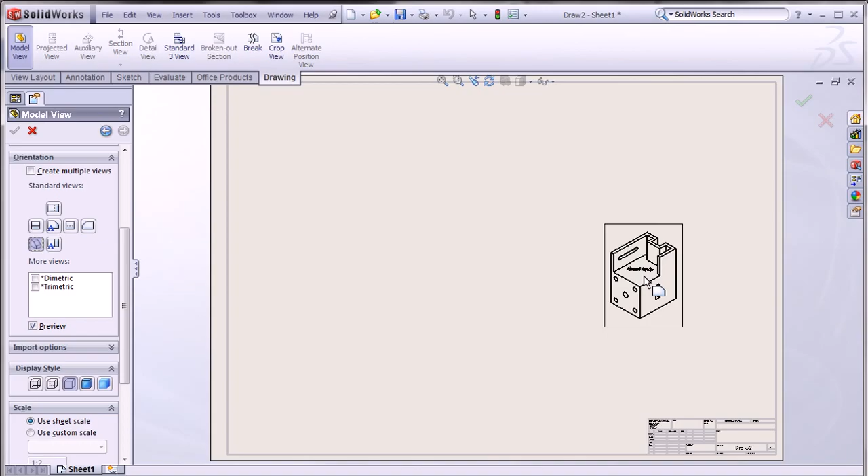نختار شكل الديسبلاي، شكل العرض، أو بهذا الشكل، أو بهذا الشكل، أو يكون شيدد.

نختار العرض، hidden lines removed. أوكي.

نختار المسقط الأمامي مثلا أو الجانبي، فيقوم بالتغيير عليه في ورقة الرسم. نقوم بوضعها في المكان المناسب.

أوكي. الآن المسقط الجانبي والعلوي يتم إنتاجهم من هذا، المسقط العلوي.

هناك عدة خيارات أيضا، وهي خيارات السكيل مثلا، الدايمنشن، use sheet scale أو use custom scale. في هذه ورقة الرسم السكيل هو 1:2، يمكنك التعديل عليه.

dimension type: projected، true، و3D display. نختار المسقط الأمامي في هذا المكان.

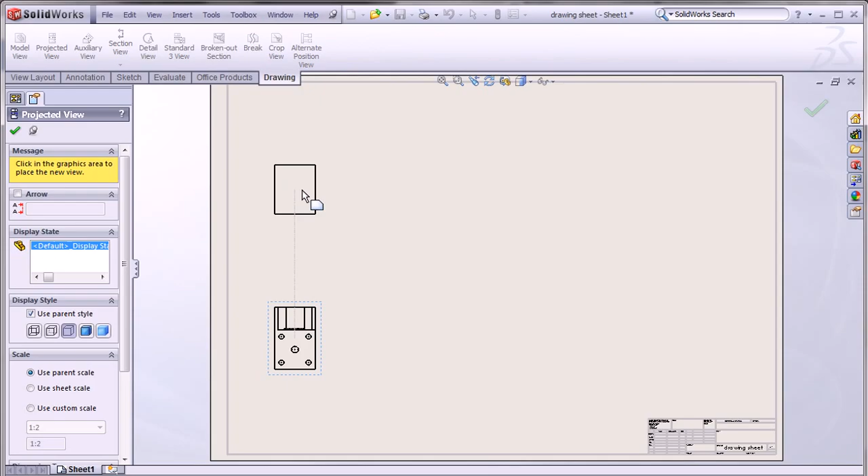للأعلى يكون المسقط العلوي، والمسقط الجانبي، والمسقط الثلاثي. أوكي.

الآن نقوم بترتيب الورقة، بهذا الشكل.

السبب وضع عرضين ثلاثيي الأبعاد هو التالي: نريد عمل section view مثلا للمستوى العلوي.

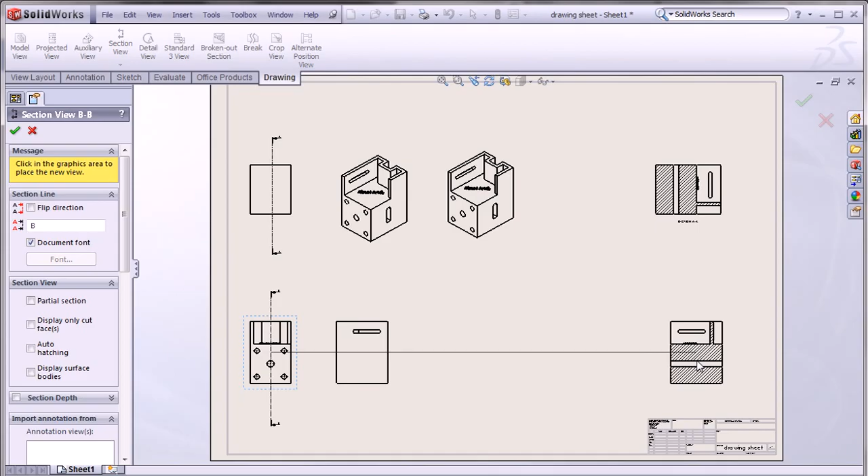فيقوم بعمل section view. نقوم بعمل section view للمستوى الأمامي بهذا الشكل، وللمستوى الجانبي أيضا بهذا الشكل. السكشن فيو يقوم بقص المجسم إلى نصفين.

أما الألايند سكشن فيو فيقوم بقص المجسم إلى أرباع. فهذا ألايند سكشن فيو، أما هذا فسكشن فيو، وكلها مسمية بأسمائها. أوكي.

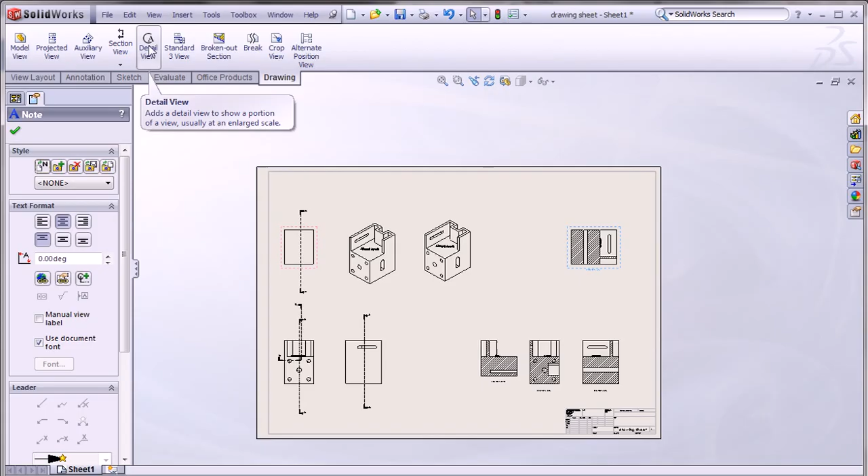الآن نختار الديتيل فيو. نستطيع عمل الديتيل فيو عن طريق رسم دائرة في المكان الذي نريد توضيحه، فمثلا نقوم بعمل ديتيل فيو في هذه الناحية، ونقوم بتكبيرها.

ووضعها في أي مكان. نلاحظ تم تكبير هذا ديتيل فيو. نقوم بتحريكه، ووضعه بمكان مناسب.

الآن نستخدم البروكن اوت سيكشن. broken out section يتم على المساقط نفسها عن طريق رسم spline في المكان الذي نريد توضيحه، فالـspline يقوم بفصل القشور الخارجية للجسم ويظهر ما في داخله إذا كان هناك تفاصيل يجب إظهارها.

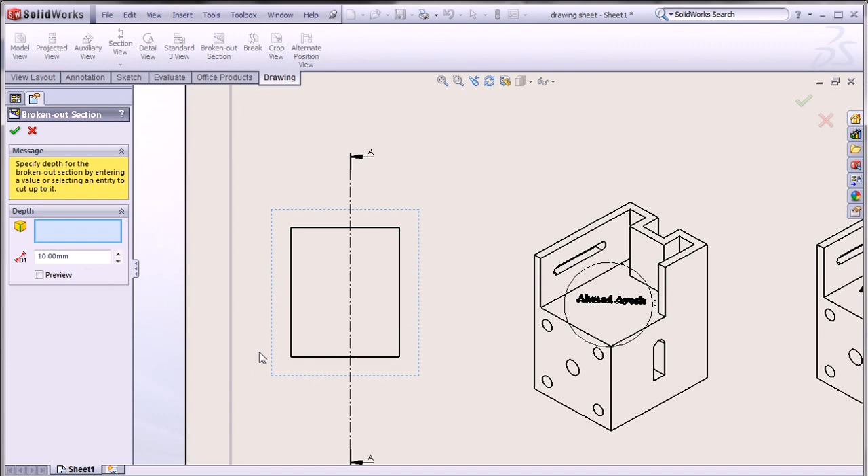مثلا نقوم بعمل section view في هذه الناحية عن طريق spline ويكون مغلق. أوكي، فأظهر لنا ما في داخل هذا الجسم عن طريق البروكن اوت سيكشن فيو.

نقوم بعمل بروكن اوت سيكشن فيو في هذه الناحية عن طريق spline أيضا، broken out section view. إذن broken out section view يقوم بإظهار الملامح الداخلية للمجسمات.

نقوم بعمل break view للمسقط الجانبي، وذلك عن طريق select drawing view to break. selected view cannot be detailed view or cropped view، إذن يجب أن يكون مسقط.

نختار شكل broken view للأعلى أو بشكل horizontal أو vertical. الجاب 10 ملم، ونختار straight cut أو curve cut أو small zigzag cut.

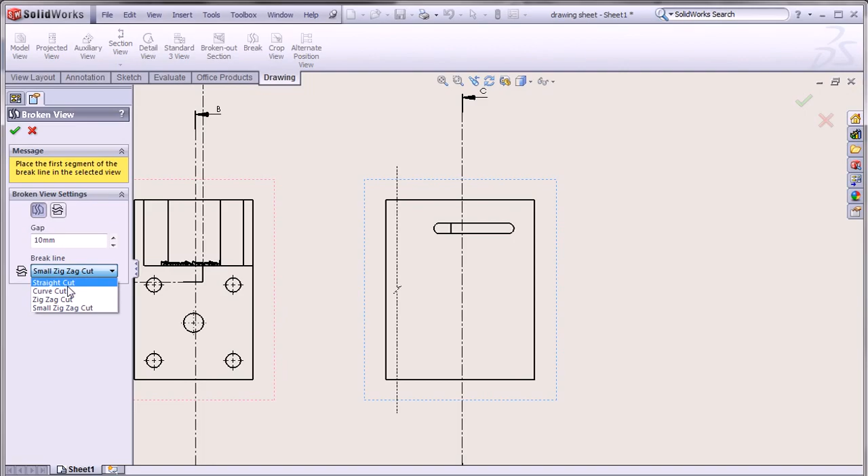نختار الكيرفد cut ونضعها في المكان، فيقوم بعمل broken view. نختار الهوريزونتال وزجزاج cut فيقوم بعمل البروكن فيو.

الآن نستخدم الكروب view. crops an existing view to show only a portion of the view، عن طريق رسم دائرة. نرسم دائرة في البداية، نرسم دائرة في هذه الناحية، ومن قائمة drawing نختار crop view فيقوم فقط بإبقاء هذه الدائرة.

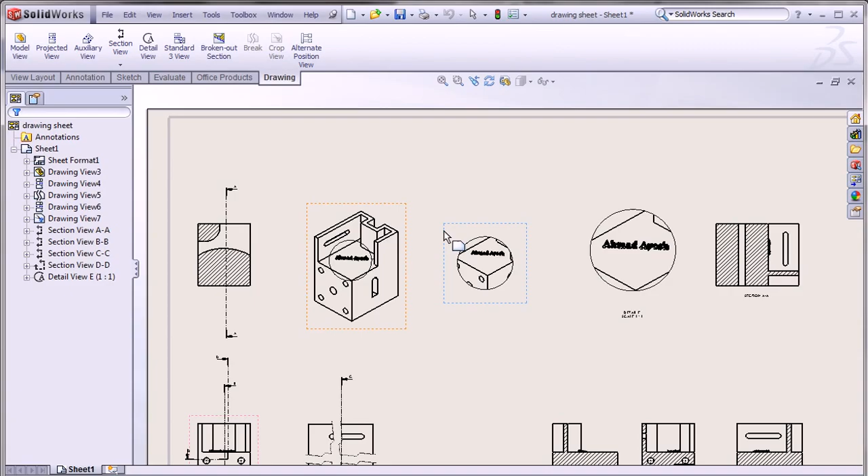هذا هو طريقة عمل drawing sheet. zoom to fit.

Drawings are used to document your 3D models in the traditional 2D format, including displaying dimensions and other instructions useful for manufacturing purposes. In SolidWorks, creating drawings is secondary to creating 3D models of parts or assemblies. What I mean is that you first create models in 3D, and then use the 3D data to generate the drawing.

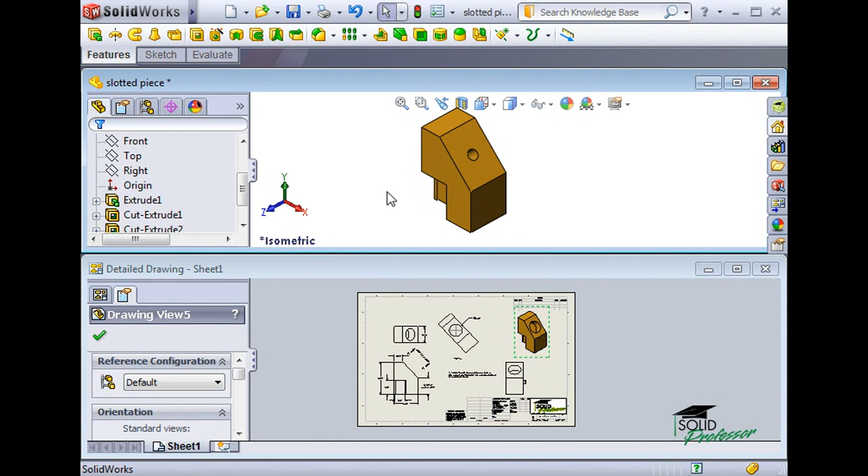Even after the drawing is created, there's a direct association between the 3D model and the drawing. When changes are made to the model, each and every view in the drawing will reflect the change. This relationship between the 3D model and 2D drawing makes the drawing process fast and accurate.

Because of the mainstream adoption of 2D drawings in the mechanical industry, drawings are one of the 3 main file types you can create in SolidWorks. To begin a new drawing, you can use the File, New drop-down menu, or use the blank page icon.

If you already have a part open, you can simply click on the Make Drawing from Part icon, or select it from the File drop-down menu. All 3 methods will bring you to the same interface to select the drawing template.

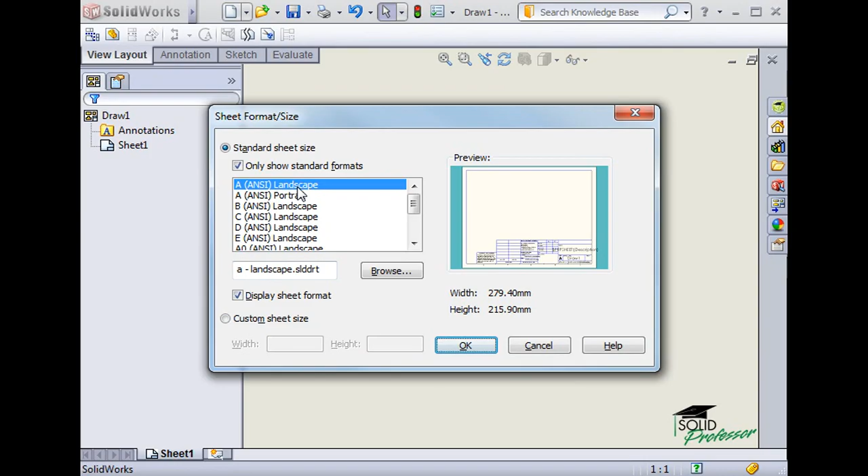This dialog box offers you a choice of sheet formats, including several standard sheet formats, as well as the option to use a custom sheet format. For this example, I'll select the standard A landscape format.

This is the drawing interface. It's laid out similar to the part and assembly interfaces, with a working area, a feature manager tree, and a slightly different toolbar. Toolbars that were used in the part and assembly interface are now gone and replaced by two new ones, the Annotations toolbar and the View Layout toolbar.

We'll take a look at the various commands on these toolbars later in this lesson. The feature manager tree is also arranged differently. Since we're no longer working in 3D, you don't see reference planes or an origin listed. Instead, you see the basic requirements for a 2D drawing: a sheet of paper listed as Sheet 1, and a sheet format. The sheet is the drawing area, and the sheet format is the title block that you see around the sheet.

There are two distinct modes you can use when working on a drawing. You can be in Edit Sheet mode or in Edit Sheet Format mode. Edit Sheet mode is used to create drawing views and add details such as dimensions and notes. Edit Sheet Format mode is used strictly to modify the title block surrounding the drawing.

Switching between the two modes is simple. By default, when starting a new drawing, you'll be in Edit Sheet mode. This is indicated here in the status bar. While you're in this mode, the title block will appear in a faint gray color. To switch to Edit Sheet Format mode, right-click on the sheet format listing in the Feature Manager tree and select Edit Sheet Format. You'll see the appearance of the title block change.

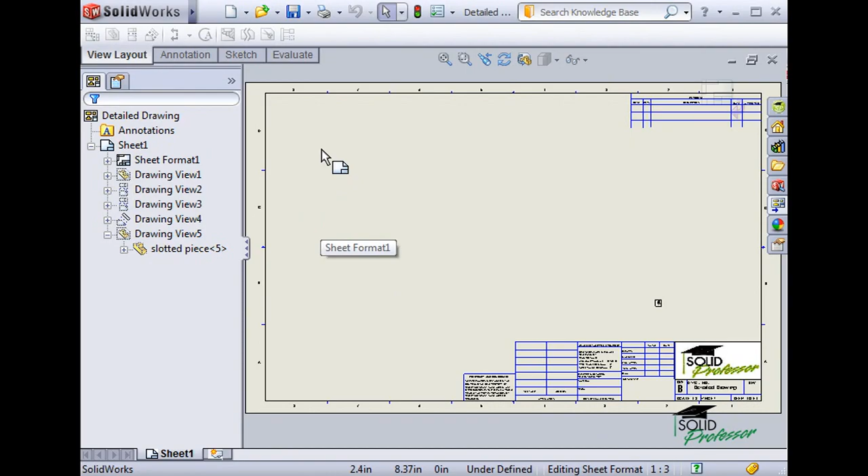When you're working with a drawing that already has existing views, it will be very obvious when you switch modes. As soon as you switch to Edit Sheet Format, all the views will disappear. This is only momentary, meant to help you focus on just the title block when you make changes. When you're done, switch back to Edit Sheet mode, and the drawing views reappear.

The specifications for drawings vary immensely from company to company and individual to individual. For the remainder of the lesson, I won't be teaching you how to create one specific standard of drawing, but rather the tools and techniques required to create and detail drawings in general. This will allow you to produce your style of drawing, no matter how unique.

Model view is a term used to describe any of the standard views available in a 3D part, such as front, right, top, and isometric. Let's begin a new drawing. I'll click the new file icon.

Specify a drawing template and select a sheet format. There are two ways of creating model views, either by activating the Model View command or by using the View Palette. Let's begin by going over the first option. You can select the Model View command from either the Insert drop-down menu under Drawing View, Model, or by using the Model View icon on the Drawing toolbar.

Now as I move my pointer into the working area, you can see there's a block next to my cursor. This block indicates that you're in the process of creating a view, and that you must now tell SolidWorks what part or assembly you intend to show in the view. Although we're working on a model view in this example, this block will show up whenever it's necessary for you to identify which 3D model you're referring to.

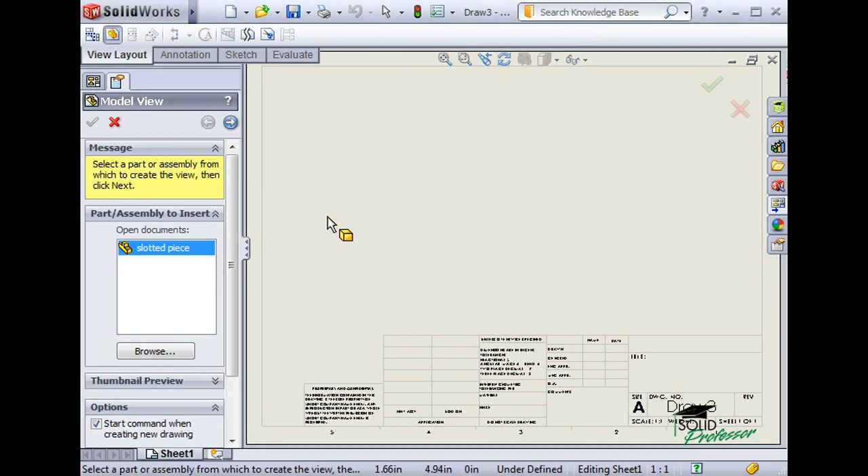Here in the Property Manager, you'll see a couple different ways to identify the 3D model that will be associated with this drawing. You can either select from a list of models which are currently open, or browse for other existing models. Once I select it, I'll click the Next button.

The Property Manager now displays a message telling me how to proceed with this model view. I'll begin by adding a single view and specifying the view orientation that I want displayed for this view, front in this case. Before I click on the sheet to place the view, I'll be sure to have the Auto Start Projected View option activated, and then click somewhere on the drawing sheet to locate the view.

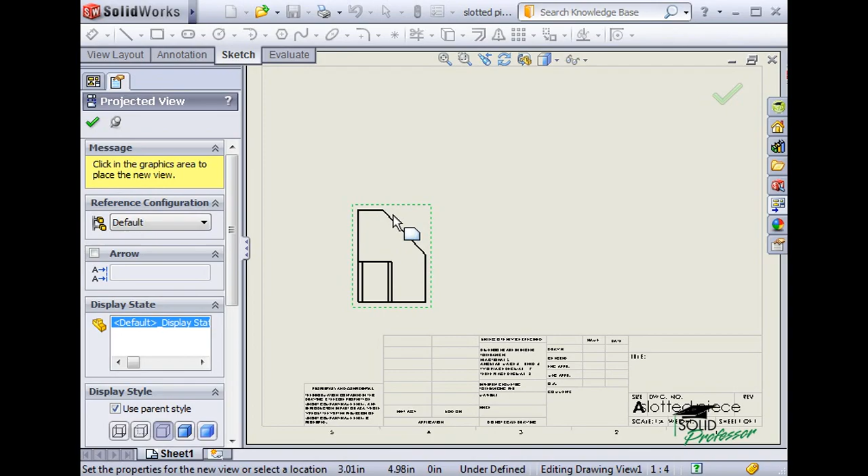Since I had the Auto Start Projected View box activated, the Property Manager automatically switches to Projected View mode. When you move the cursor away from the view you have just created, SolidWorks automatically projects the top, right side, and isometric views for you.

Before we proceed, let me show you another way you can have SolidWorks create these views for you automatically. I'll click Undo to get rid of these views.

To begin inserting views again, I'll go to Insert, Drawing View, Model to get back into Model View Property Manager. I'll use the same part as before, but this time instead of using the single view with the Auto Start Projected Views option, I'll select Multiple Views. With this option, I can click on the icons that represent the standard views I want shown. I'll click the icons for Front, Top, Right, and Isometric.

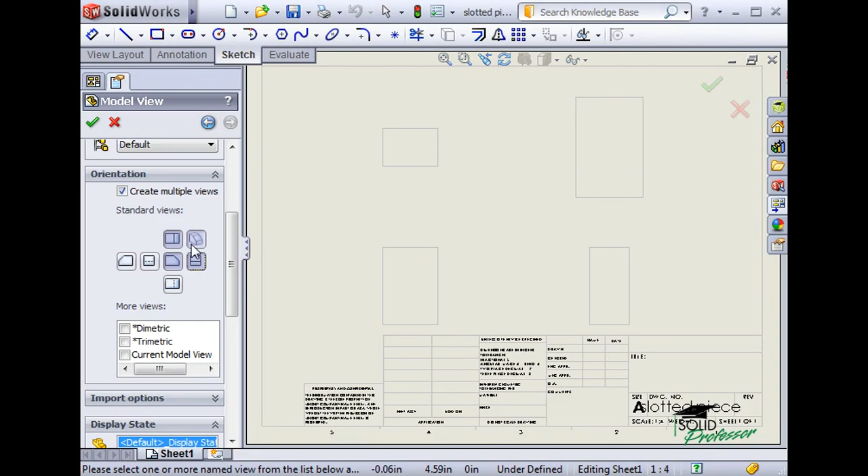When I click OK, all of the views will be added. The front view is the main parent view of all of the other views.

Now, if the parent view you created is not the orientation you desired, you can click on the view and then click on one of the other view icons to use that orientation instead. As soon as I do, SolidWorks prompts me that this will update all of the other dependent views projected off this main parent view. When I click Yes, all of the other views will be updated.

Also, to move any of these views, you can click and drag a view by clicking anywhere on its border or any other model edge or vertex. You can also move views and other items in a drawing using the arrow keys on your keyboard. Just select the view and press the arrow keys to move it.

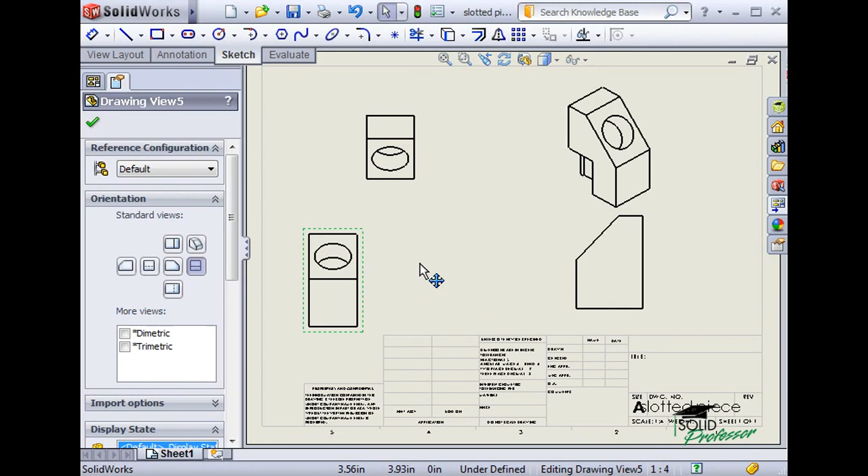As I mentioned earlier, there's actually another way to insert drawing views besides the Model View command we just went over, the View palette. Let me delete these views and we'll begin again with a clean sheet.

To activate the View palette, click on the View palette icon found on the task pane. As with the Model View command, I can select from a list of open parts, or I can browse for a specific part. I'll go ahead and select from the list. Next, I simply drag and drop a view from the View palette into our drawing.

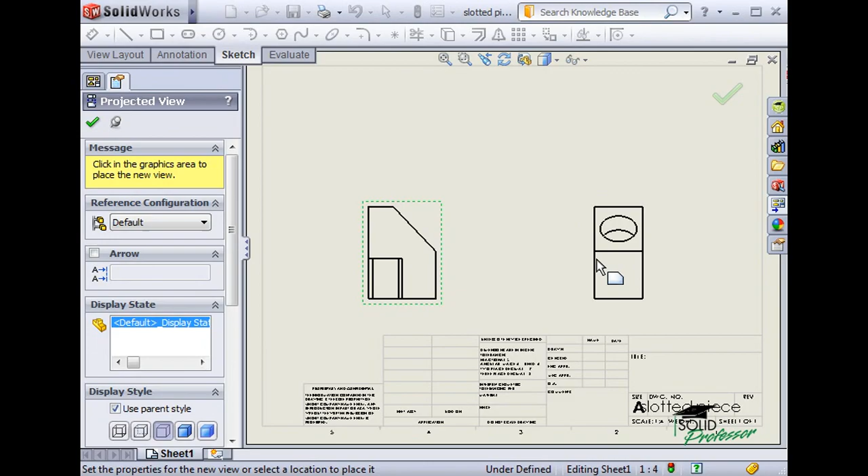Once the drawing view is placed, the Projected View command is automatically launched, allowing you to create the remaining views.

Although the View palette does allow you to preview all possible orthographic views of a part or assembly, it's not possible to select multiple views in the View palette and drag them together onto the drawing. It's only possible to drag a single view and then use the Projected View command to add the additional views.

Once you already have a view created in your drawing, a projected view is one of the simplest views to create. Simply activate the Projected View command from the View Layout toolbar. Once the command is active, all you have to do is select the view you wish to project from, and move the pointer in the direction you wish to have the view projected.

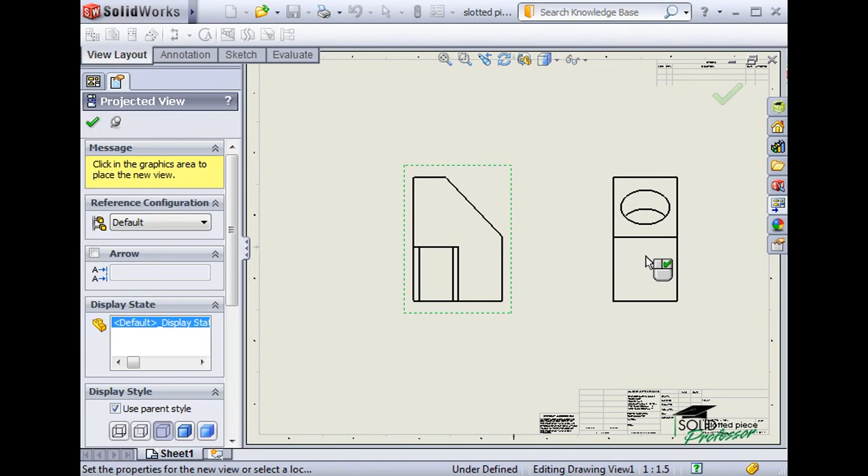Once the view is in the proper location, click and it will be created. With the projected view, the Property Manager gives us an option to display a view arrow along with a label if necessary.

You can see in this isometric view that the part has a hole on this angled face. In order to display the hole properly in a drawing, an auxiliary view must be used.

To create an auxiliary view, activate the Auxiliary View command from the icon in the View Layout toolbar. Once the command is active, click the angled edge of the model to establish the direction of the auxiliary view. Once again, just move the cursor to the desired location and click to locate the view. The view arrow can now be moved or stretched by clicking the arrows or the line and dragging them.

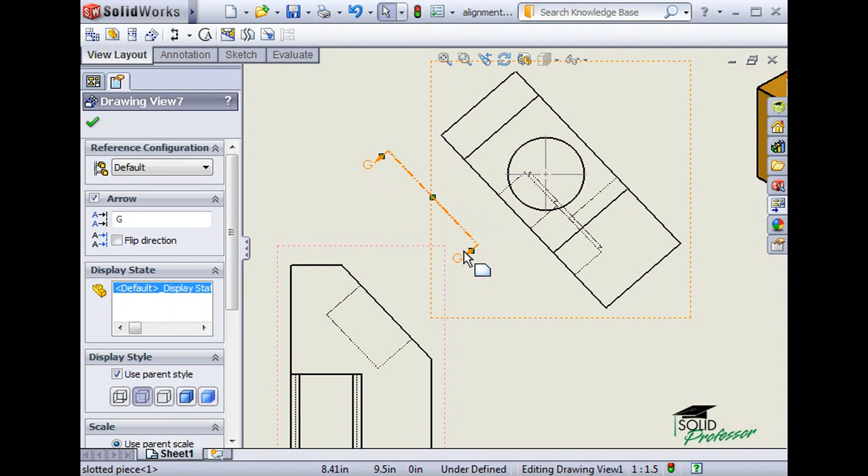It can also be hidden by unchecking this option in the Property Manager.

One of the more common views used in 2D drawings is the section view. Creating a section view in SolidWorks is straightforward. Once a view is in place, I use the Section View icon here in the View Layout toolbar, or use the Section View command in the drop-down menu under Insert, Drawing View, Section.

To create the section view, I simply need to draw a line indicating where I would like to section the drawing view. In this case, I would like to create a section view that cuts through the center of the circular part.

However, notice as I move the cursor near the view, I'm not getting any feedback. At this point, if I draw the section line, there's no way to know if it's cutting through the center. There's actually one step I need to do before drawing the section.

I need to wake up the drawing view's geometry to be used as a reference. If I hover my cursor for a second over the outer circle, notice the geometry is activated, and I see inference lines to the center of the circle. This process works for any other geometry as well in a drawing view.

Simply hover over a line or point or any other geometry to wake it up and infer to it for aligning a section view. Now I just sketch a line through the view that I wish to section. Be sure the line extends completely through the part.

There are several options in the Property Manager that will allow you to change the way the section view is displayed. These options become available upon selecting the view, so it becomes highlighted. You can flip the section view direction by clicking the Flip Direction checkbox, change the label used for the view, the note font, and here you can select to display only the geometry that is cut, thus eliminating any edges that are visible in the background.

To change the location of the section view, I can activate the Section Depth option. This displays a line parallel to the section line that I drew earlier. This new line determines where the section view is taken. However, the original section line will remain unchanged.

I can change the depth of the line by using the spin box, or by dragging the line in the graphics window. Finally, if I had any edges in the view, I could use them as a reference for the section view depth. To see a preview of what the section view will look like, I simply click on the Preview button.

Since I want my section view to be through the center of the part, I'll deselect the Section Depth option and click the green check to finish the section view.

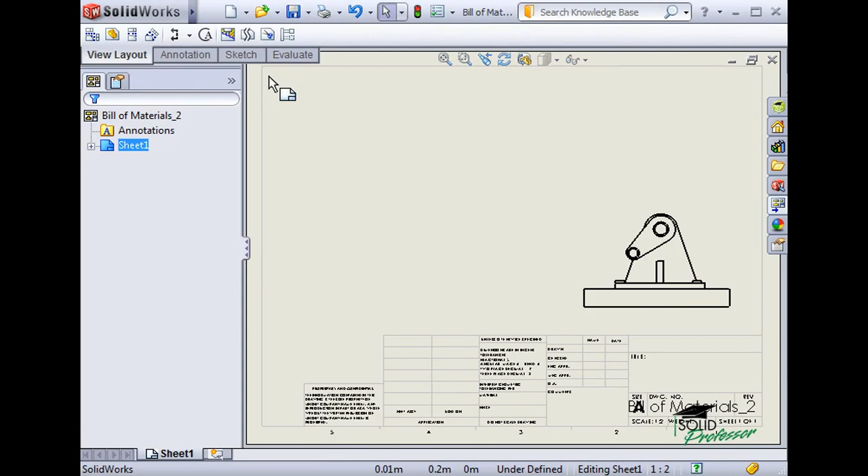When creating a section view of an assembly, you'll find options available that did not come up when creating section views of individual parts. Creating the section view line is the same. You use the same section view icon and sketch a line through the assembly. The difference becomes apparent after completing the section line, at which point this dialog box will appear, the section scope.

With the section scope, when creating a section view through an assembly, it's possible to exclude one or more components from the section cut. Here, for instance, I wish to cut through the base plate and the bracket, but not the swing arm. By clicking the swing arm, it's added to the list of components that will be excluded.

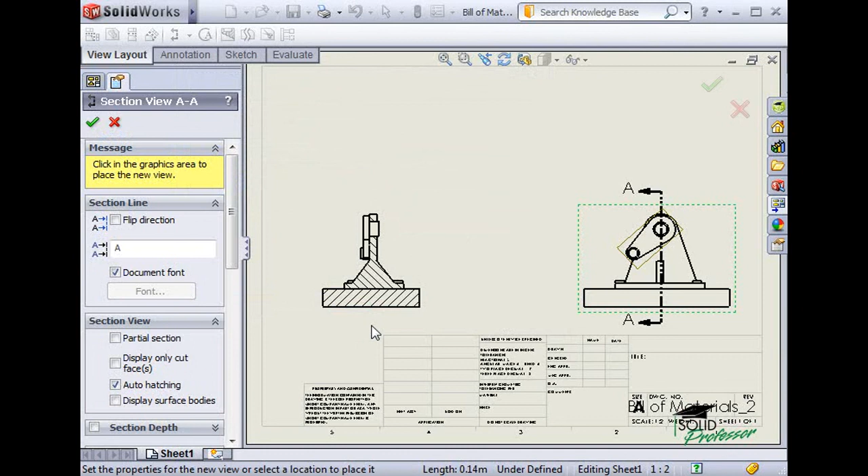Before I click OK, I'm also going to check the auto hatching option. This will cause the crosshatch lines of adjacent components to alternate direction, making it easy to tell them apart. Now I'll click OK, and click once more to locate the section view.

As I zoom in, notice the swing arm has not been cut. Also notice how easy it is to tell components apart with the alternating crosshatch.

If you need to change which components are cut, simply right-click on the section view and select Properties. The Section Scope tab is the same one we saw when the view was first created. I can add to the list of excluded components or take items away either by clicking on them again or by highlighting an item and pressing Delete on the keyboard.

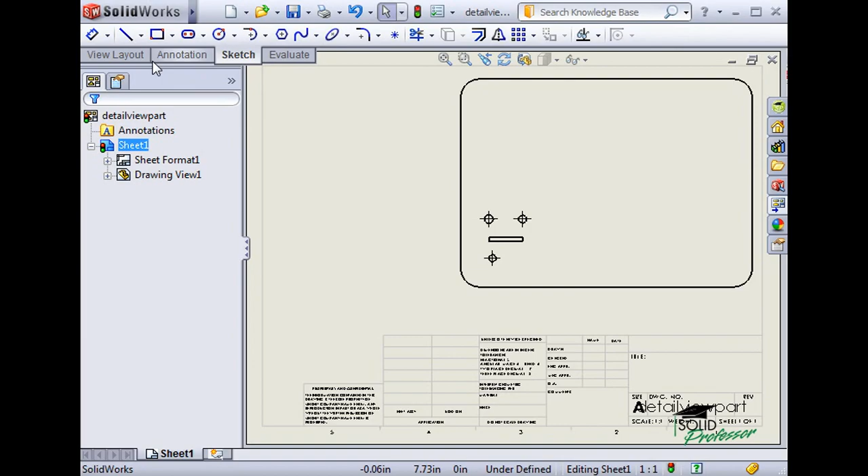When a view contains small features that are difficult to see as a standard drawing view, a detail view can be used to zoom in and make things clear. To create a detail view, click on the Detail View icon in the drawing toolbar, or find the Detail View command in the drop-down menu under Insert, Drawing View, Detail.

The command automatically activates the Circle Sketch tool. With the Sketch tool, draw a circle to identify the area that you wish to zoom into. Once the circle has been sketched, move the pointer to the area on the sheet where you wish to locate the view and click once.

The detail view will appear with a label. The label and font can be customized here in the Property Manager. There are also options in this drop-down list that allow you to select different display options for the view.

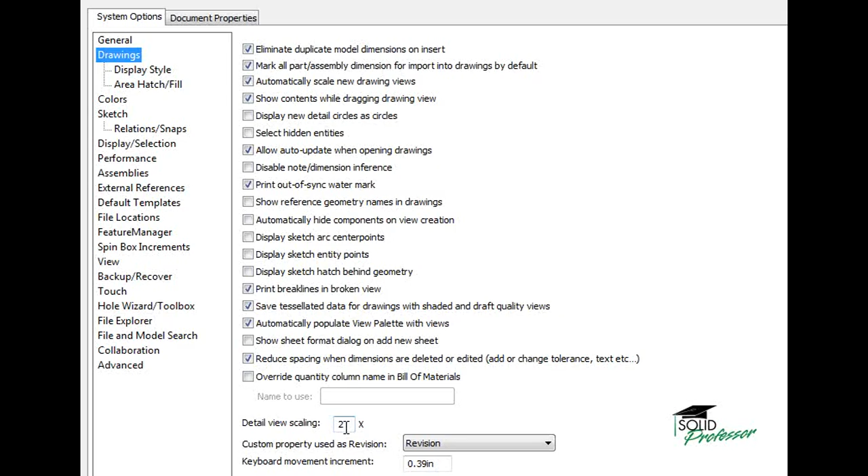Notice that the view appeared with a custom scale of 2:1. This automatic scaling happens as a result of a setting found under System Options in the Drawings section. Here you see the default scale I'm using is 2x, or twice the overall sheet scale.

Even after the detail view has been created, the area covered by the detail view can be changed at any time. To increase the area of the detail view, click on the circle used to create the view and drag the circumference of the circle.

To move the circle, click and drag the center. As you do this, notice that the detail view will update immediately to show you the result.

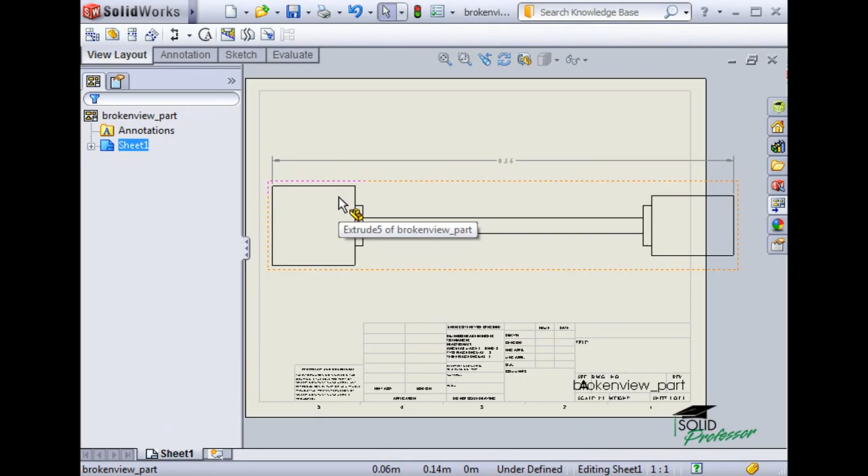A broken view can be used to take a view like this, which is too large to fit on your drawing sheet, and break it so only important details are shown. To break a view, select the break icon in the View Layout toolbar.

Select the type of break in the Property Manager and the desired gap size and break line style. Next, simply move your cursor to the area of the view where you would like to start the break. Click once to locate the beginning of the break, then click again to locate the end of the break, and the view is automatically broken.

Any dimensions spanning the break will still display the true dimensional value. However, the dimension line will have a visual indicator that it is dimensioning a broken view. To create additional breaks, simply repeat the process while the command is still active.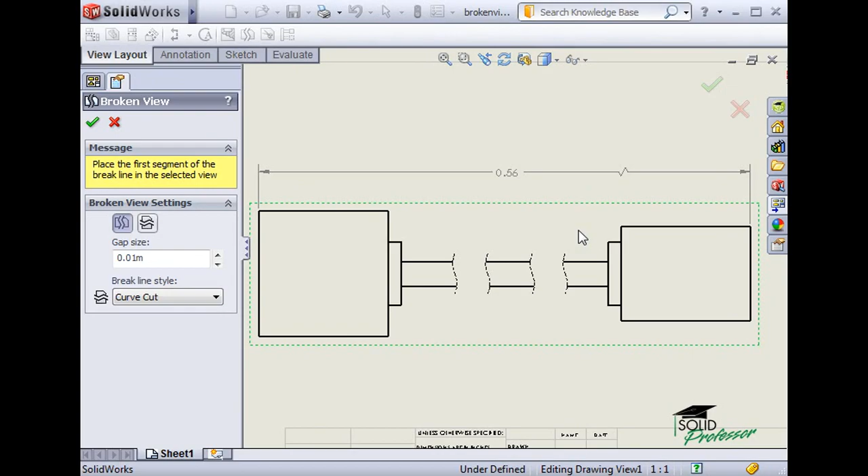To make any changes to the break properties after it has been created, select or right-click the break lines and make changes in the Property Manager or from the right-click menu.

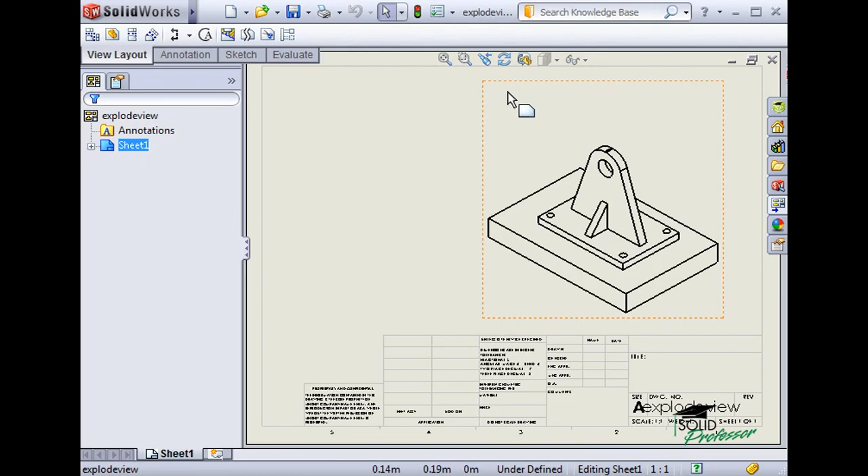Any drawing view of an assembly can be displayed in an exploded state, as long as the assembly already has an exploded view defined. Here, for instance, I have an isometric view of this assembly. If I wish to show this in its exploded state, I simply right-click on it, select Properties, and right here you see the option to show an exploded state. As soon as I click OK, you see the view update.

Another option you have with any assembly view is to hide components. All I have to do is right-click and select Properties again, and here you see the Hide Show Components tab. Any components listed in this window will be hidden.

To add components to the list, you just click on them in the graphics window, and when you click OK, the component is hidden. To show the component again, repeat the process and take the component off the list by selecting its name and pressing Delete on the keyboard.

When working with parts or assemblies, you can control the way a model is displayed using the Display Style flyout menu from the Heads Up toolbar. These same display options are available when working with drawings.

However, notice that by default the icon is grayed out. In order to activate the icons, I first have to select a view. This is because each view can be displayed differently.

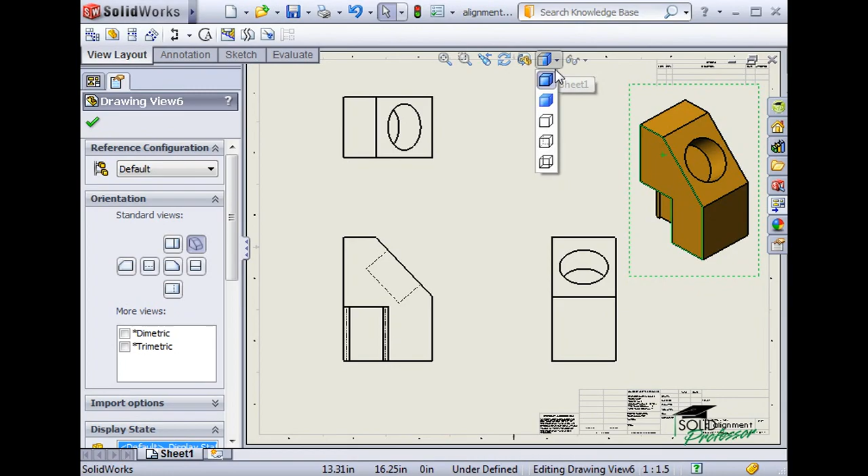For example, I can display the isometric view as shaded, the front view with hidden lines visible, and leave the rest as they are. If you want to change several views at once, you can Control-select them, then choose the display type you want.

If you find yourself constantly changing the way your views are displayed, you may find it useful to change the default appearance of all new views you create. This is a setting under Options, Display Style.

Save some time by setting this option to the display type you use most often. Note that this setting does not affect views already in place. It will only affect new views you create in the future.

There are several types of views that are automatically aligned to a parent view when they are created. These include section views, auxiliary views, and projected views.

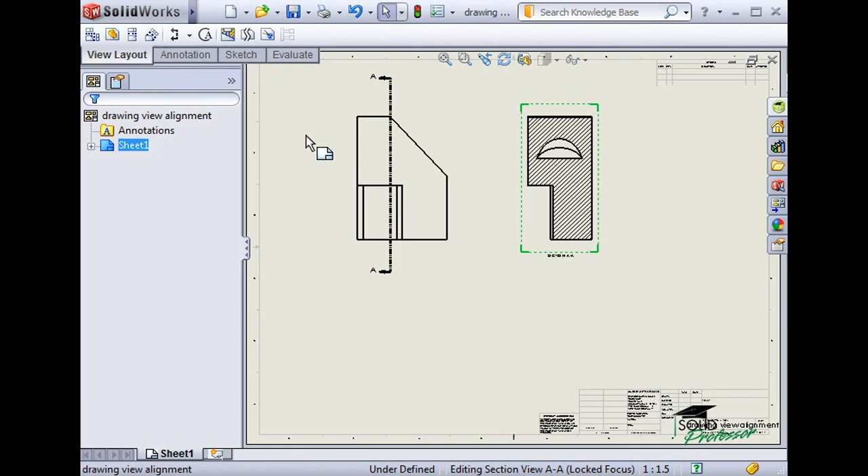In this case, I have a section view that I want to move down below the parent view. As I drag the view, you can see it is aligned so that it can only move side to side. I can break this alignment by right-clicking on the section view, selecting Alignment, and Break Alignment. Now the view can be dragged anywhere on the sheet.

Should you ever need to realign the view, you can right-click to access the alignment option again and simply select one of the alignment settings, or default alignment to return to the original setting.

When working with SolidWorks drawings, the scale of drawing views can be controlled at two levels. You can change the scale of the entire sheet, or you can change the scale of individual views.

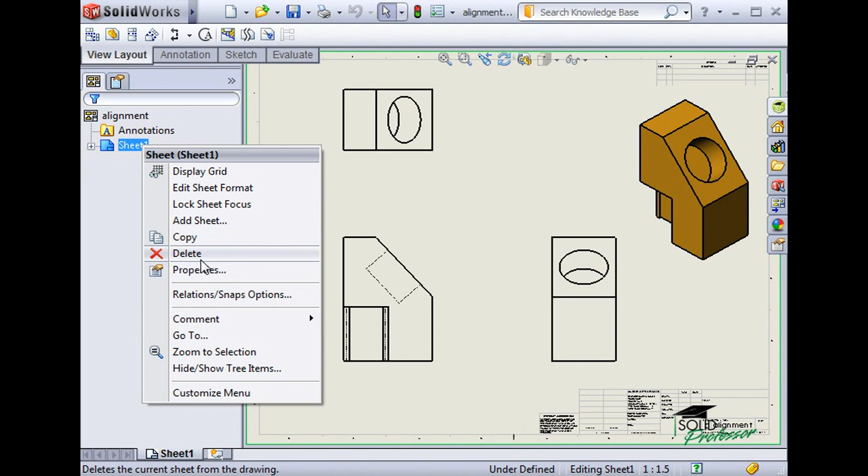To change the scale of the entire sheet, right-click Sheet 1 on the Feature Manager tree and select Properties. I can also access sheet properties by right-clicking anywhere on the sheet in the graphics window. Selecting Sheet Properties will cause this window to appear.

Among several other properties, including the size of the sheet and the type of sheet format I'm using, I have access to the sheet scale. I'll make a change here and click OK. As soon as I do, you can see that every view on the sheet is now changed.

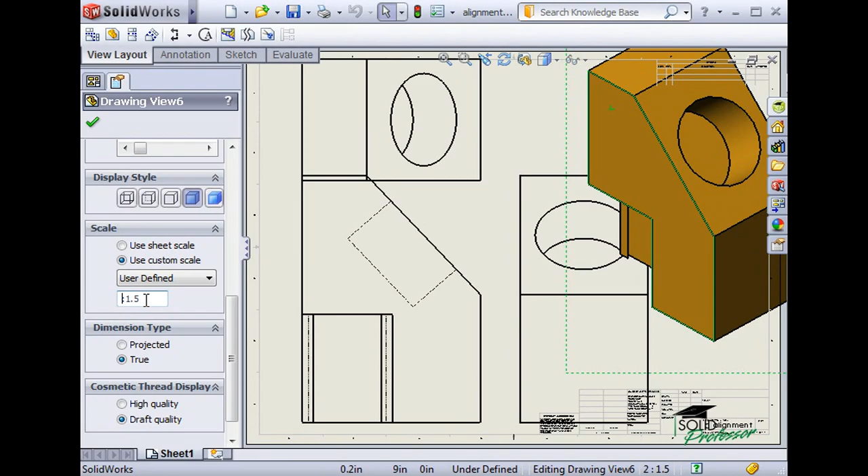If, on the other hand, you only want to change the scale of one view, simply click on the view to activate it, and in the Property Manager you will see the Custom Scale option. I'll activate it by selecting the checkbox, type in a new value, and click the green check to accept the change.

Something to keep in mind is that this view is now set to use a custom scale, so when you make a change to the sheet scale, this view will not be affected. To return the view back to the sheet scale, simply click on the view and check Use Sheet Scale in the Property Manager.

Probably the most important element of detailing a drawing is displaying a part or assembly's dimensions. When dimensioning a detailed drawing in SolidWorks, it's important to know the two types of dimensions you can use: driving dimensions and driven dimensions. Here we see examples of both. Although they might look similar, there are some vital differences that differentiate the two.

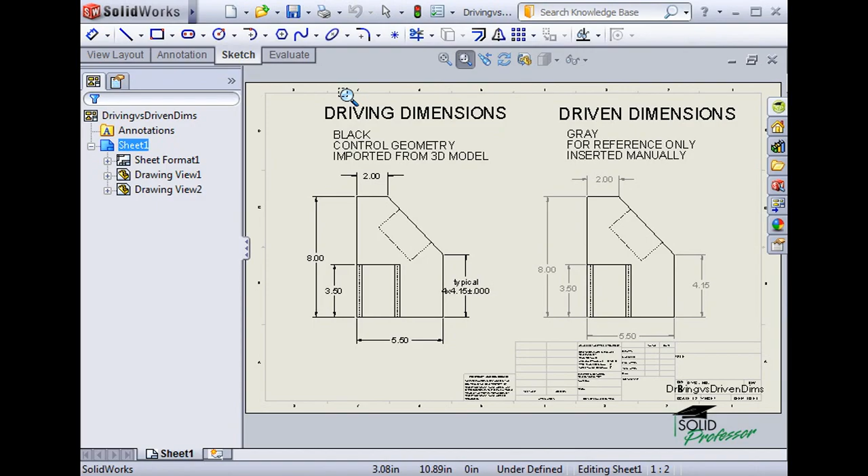First, let's look at driving dimensions. These dimensions will appear black by default. The color is not important in any way except that it helps us identify them from driven dimensions, which appear gray. Driving dimensions control the geometry they are attached to.

They drive the model. For instance, if I double-click this dimension of 2 inches, a spin box comes up and I have the ability to change the dimensional value. When I change the dimension to 1 inch and rebuild, you can see the model change. If I change it back to 2, the model changes once again.

So you see that a driving dimension is no different than the dimensions you would use to create this part in 3D. In fact, that's exactly where these dimensions come from. They are directly imported from the 3D model, whether it be a part or an assembly. Because they can be easily imported, driving dimensions are used primarily to save time when detailing a drawing.

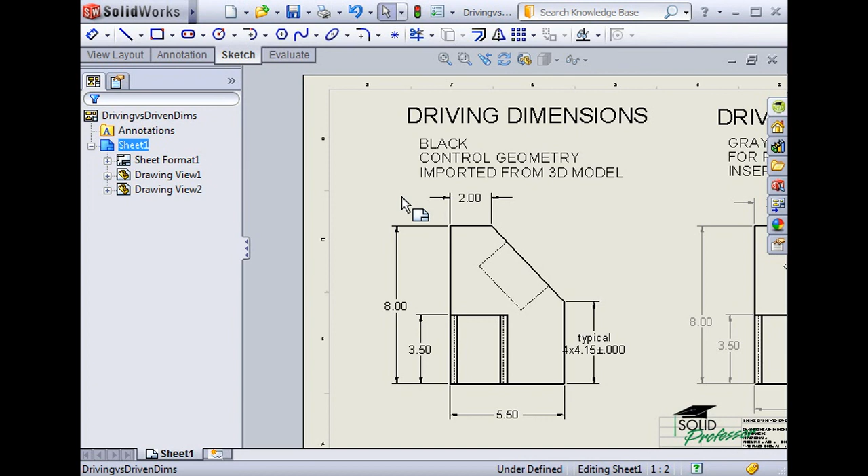Now let's look at driven dimensions. As I mentioned, driven dimensions will appear gray by default, so you can tell them apart from driving dimensions. Driven dimensions are for reference only. They're there to tell me the length of an object, but their value cannot be changed to drive the model.

If I attempt to double-click a driven dimension, I don't see a spin box where I can change its value. Instead, I only see the dimension's Property Manager. Instead of being imported from the 3D model, driven dimensions like these are added manually using the Dimension tool.

While this may seem like a redundant process, driven dimensions offer you more control in how you want your drawing dimensions to appear. In the following sections, we'll learn how to create dimensions and take a close look at the options available with each type. This will help you decide which type of dimension, driving or driven, best suits your needs.

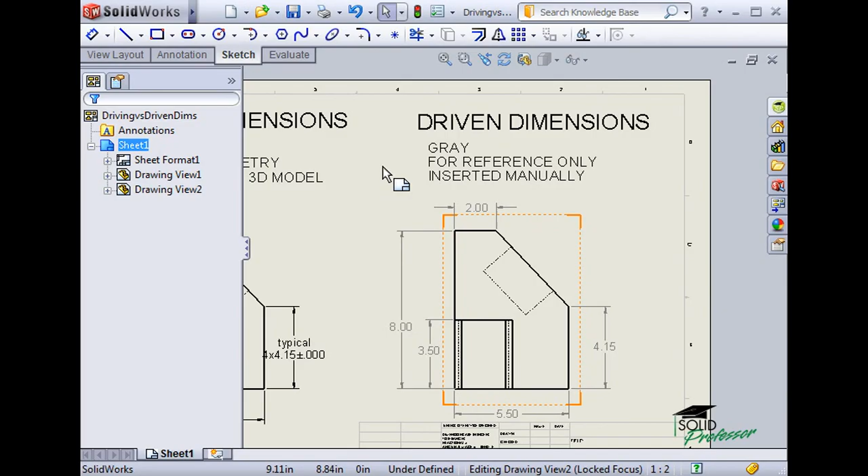The 3D model, when it was created, has dimensions that were added in sketches and features to determine the part's size and shape. As we saw in a previous lesson, I had the option to mark dimensions for drawings on this button here while creating the part.

One method of dimensioning a drawing is to import these dimensions from the 3D model. These dimensions, once imported into the drawing, are driving dimensions. As we learned, this means they can be changed in the drawing and reflect the changes back to the model. So how do we import these dimensions from the model into the drawing?

Well, to do this, select Model Items. Here in the Property Manager, you can select the types of dimensions, annotations, or reference geometry that can be brought over from the 3D model. In this case, I'll only select dimensions that were marked for the drawing to import.

Here are options which help control the appearance of the dimensions that will be imported. The first allows me to specify whether dimensions should be imported into all drawing views on the sheet. If I only want to bring dimensions in for one view, I can clear this checkbox and select which view the dimensions will appear in.

I can select one or more views in this window, and only those listed will be considered when importing dimensions. In this case, I'll import dimensions into all views.

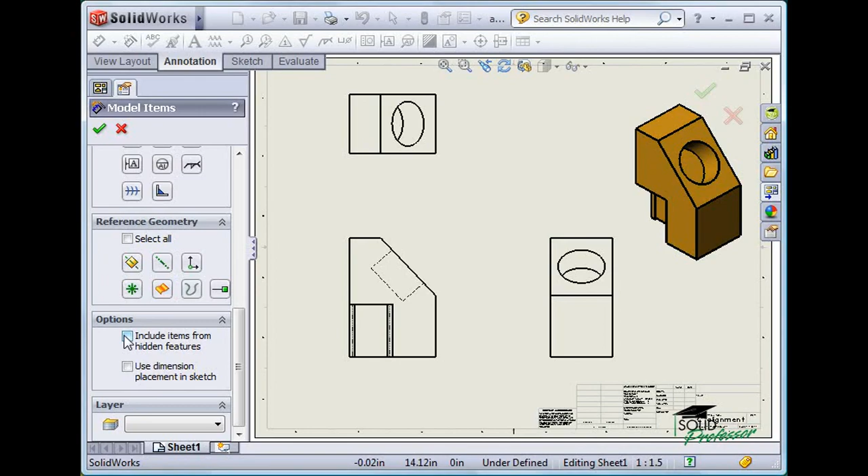As soon as I click OK, all dimensions that were marked for the drawing will be brought over from the model. You can see how quickly a drawing can be dimensioned this way. But also notice it's a bit messy and difficult to read.

This can be fixed by moving dimensions and changing their appearance. To move a dimension, you simply click on it and drag it around the screen. Notice that when I click on a dimension, it becomes highlighted, and here in the Property Manager, I can see the properties that correspond to it.

I can use these properties to change the precision of the dimension, or to add a tolerance if necessary, or a number of other options specific to this dimension's appearance. I can also use these dots to change the direction of the arrows.

If I right-click the dimension, you'll see there are display options. These allow me to do things like center the text between witness lines or display the text within parentheses.

One more option that may be useful is here at the bottom of the Property Manager. It's here in these fields where I can add notes to a dimension, for example, typical or 4 times to specify a quantity.

If you want to move a dimension from one drawing view to another, you can do this by holding down the Shift key while dragging it to another drawing view, and the dimension will be moved.

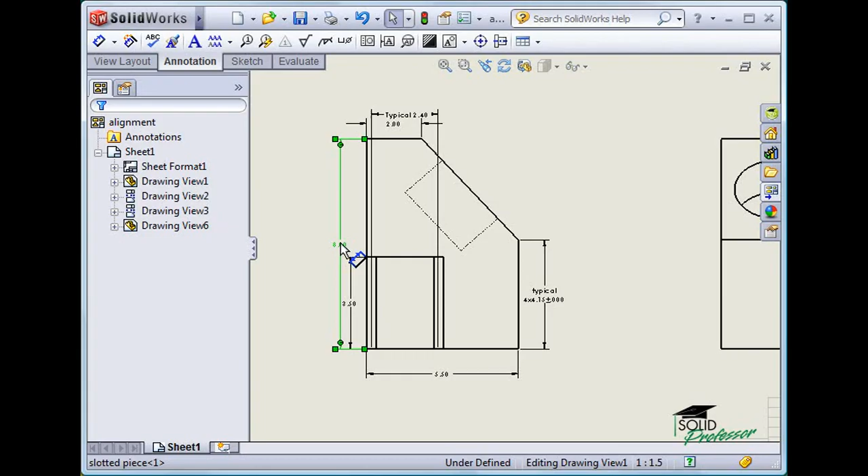Another option is to copy the dimension or any other type of annotation from one drawing view to another by holding down the Control key. The cursor will give you feedback if a move or copy from one drawing view to another is possible or not. If you need to get rid of a dimension, just click on it and press Delete on your keyboard.

Note that although these are driving dimensions, deleting them from the drawing will not affect the 3D model.

In this section, we'll take a look at the many options available when using driven dimensions in drawings. While driven dimensions can take more time to create than inserting dimensions from the 3D model, many users prefer them because their appearance and location can be controlled more precisely as they're created.

Driven dimensions are created just like dimensions you would use to define a sketch. You simply click on the dimension icon and select the entities you wish to dimension. After I click on the segment, a manipulator appears which lets you create rapid dimensions. This manipulator is convenient because each dimension will be automatically positioned and spaced evenly apart.

To create rapid dimensions, I hover my pointer over the circular manipulator to see a preview of the dimension. To move the dimension to the other side of the part, I can move my mouse to the side of the manipulator or press the Tab key.

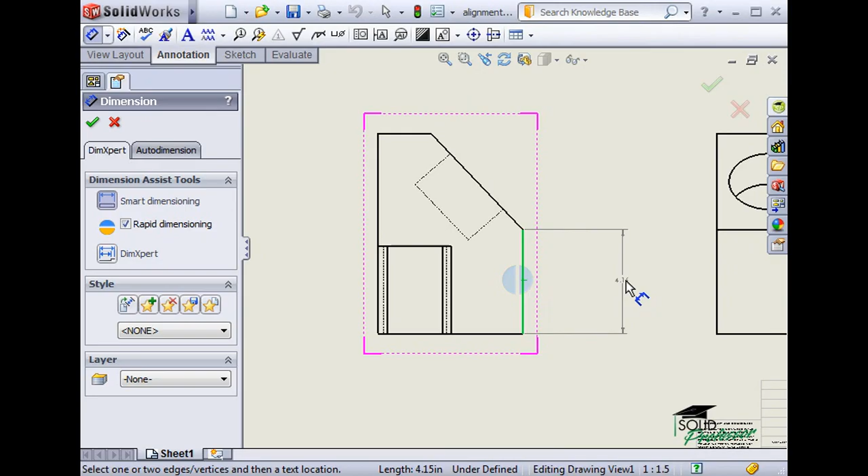However, if I move the cursor away from the manipulator, it disappears, and I can manually place the dimension anywhere on the drawing. I'll click on another line to dimension. To place the dimension, I can either click on the manipulator or press the space bar.

I'll continue to add more dimensions, and you can see that the manipulator will space them evenly with the last dimension I placed.

The manipulator is slightly different when dimensioning circles or by clicking on 2 points that are not horizontal or vertical to each other. If I dimension a circle, I have 4 choices for placing the dimension.

If I click on 2 points that are not horizontal or vertical to each other, I'm also given 4 choices. The left and right options will dimension the vertical distance, and the top and bottom will dimension the horizontal distance.

However, if I wanted to dimension the angled face, I have to click on the line to get the overall dimension. Once these dimensions are in place, you can highlight them and move them or change the direction of their arrows. This works the same as with driving dimensions.

I can even add tolerances and customize other aspects of the dimension if necessary right here in the Property Manager. I can also quickly change the tolerances and formatting of the dimensions by using a flyout window called the Dimension Palette.

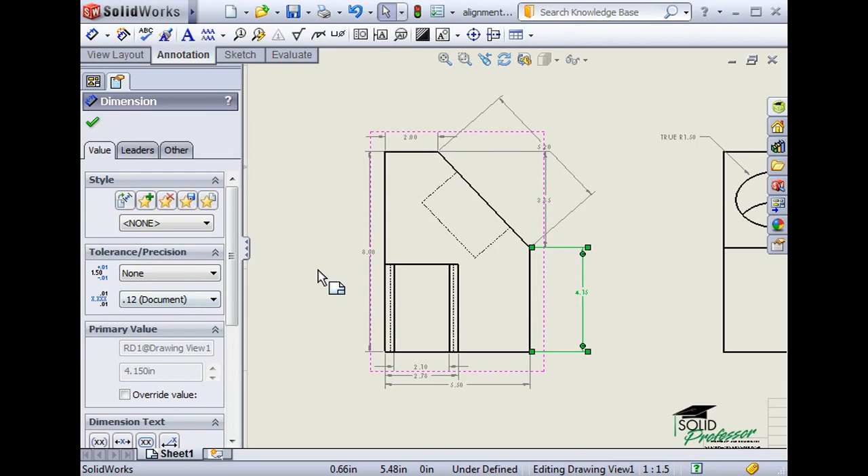I can show the Dimension Palette by clicking on a dimension, and I can hover over it to show it completely. This is where I can adjust the tolerance, precision, and formatting. If I make changes using the Dimension Palette, the formatting is saved in the Styles or Star icon drop-down.

I can select another dimension and apply the same formatting by clicking on the star icon, then select the format. You can see that by manually adding these dimensions, I control how this drawing will appear. If I were to insert dimensions directly from the 3D part, I would be giving up this control to SolidWorks, and I'd have to go back and clean up the imported dimensions.

In addition to placing regular dimensions as I'm doing here, the Dimension tool gives me access to special types of driven dimensions. For instance, I can create ordinate dimensions, baseline dimensions, and others. Don't worry that driven dimensions show up as gray. This helps tell them apart from driving dimensions. If you wish to make sure they appear black when you print, set your printer settings to print in black and white.

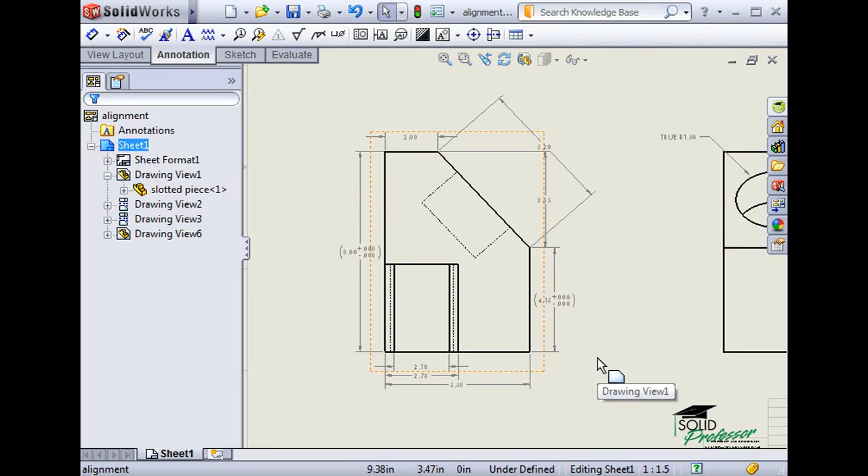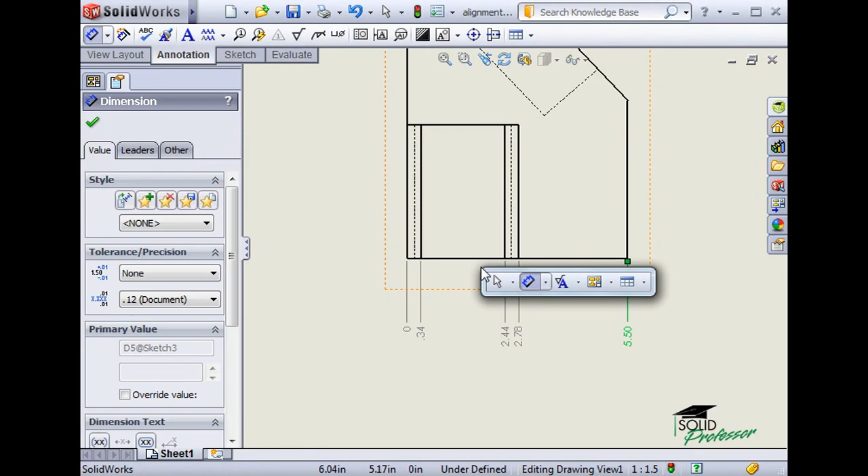Ordinate dimensions are a type of driven dimension. To create them, use the Dimension drop-down icon and select Ordinate Dimension. If you want to specify the direction of the ordinate, you can choose horizontal or vertical. In this example, I'll simply pick Ordinate Dimension, and I'll click on this left edge to define the ordinate, or zero reference. With the first click, I located the ordinate, and now every point or edge I select will automatically be added to a group of ordinate dimensions. Once I'm finished adding to the group, I can click the Dimension tool again to complete the group. One more click and the icon is turned off altogether.

Ordinate dimensions behave as a group. For example, if one of the dimensions is moved, the entire group will move along with it. If you wish to go back and add to the group, you must right-click one of the dimensions and again select More Dimensions, Ordinate.

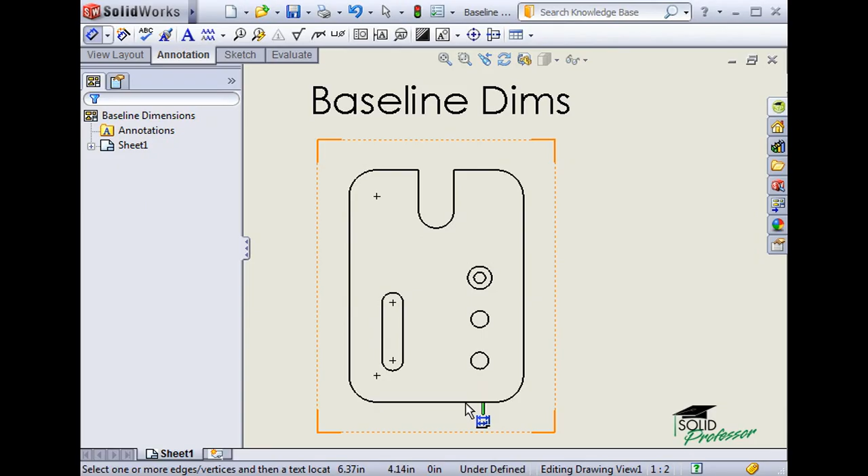Another type of driven dimension that can be useful is a baseline dimension. To create baseline dimensions, click on the Dimension drop-down icon and select Baseline Dimension. And now you can pick a point or line to establish the first dimension. This dimension seems just like any other, but as you continue to pick other geometry, the following dimensions will be automatically placed using a common baseline.

If you select one of the baseline dimensions and move it left or right, you can see they all move as a group. If you wish to change the spacing between them, you actually have to change a setting in the options of this document.

Here in Document Properties is a list of categories, including dimensions. This is where the spacing of baseline dimensions can be modified. I want to spread out the dimensions, so I'll change these values to something a bit larger. You can now see the dimensions become more spread out and much easier to read.

When you create drawings of parts that include holes, you'll likely want to use center marks to help locate the holes. As I begin a new drawing of this plate, I want to show you an option that will affect the appearance of center marks in your drawings.

You can see here I have the option of having center marks automatically added to holes and/or fillets in my drawing as soon as a view is created. Let's leave this option on and take a look at what happens. I'll go ahead and insert a front view of this part.

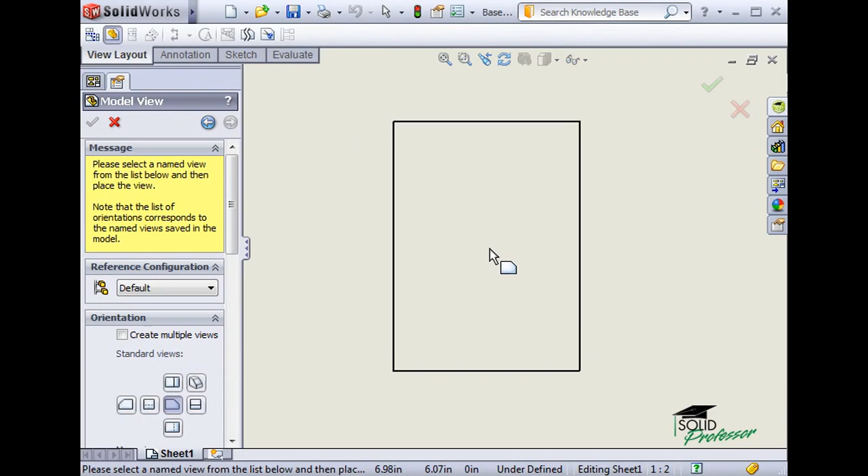With that option turned on, all of the center marks are added automatically based on my setting. Let me delete this view and turn off the center mark options. Now when I recreate the view, the center marks are left off completely.

To manually add the center marks I want, I simply click on the center mark icon from the Annotations toolbar and pick the edges that I wish to mark. Center marks will be automatically sized to fit a hole, so be sure that if you have more than one edge to select, like with this counterbored hole here, always pick the outermost edge.

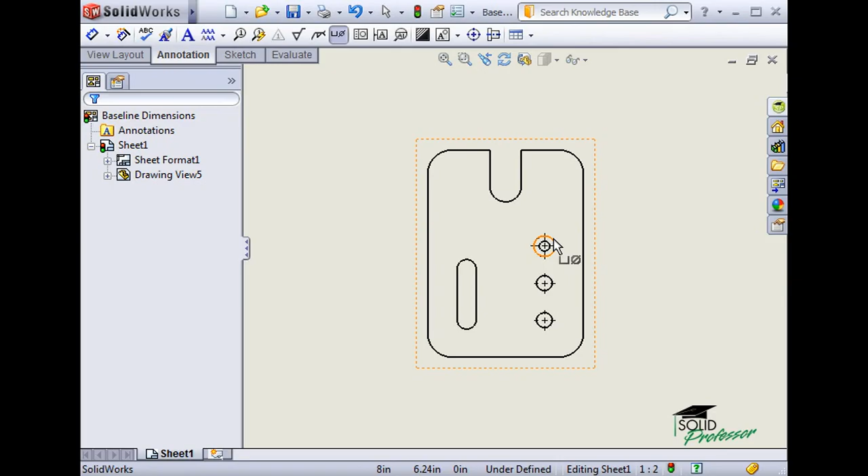Another very useful annotation is the hole callout, which automatically annotates different types of holes. This is the hole callout icon. Once it's activated, you simply click the edge of a hole. Click again to locate the callout, and it's done. You can repeat the process for each hole.

Here in the Property Manager, you can change the appearance of the callout, such as its justification, or if you need to modify the text of the callout, you can type it in right here.

Notes are an essential element in creating drawings. In this section, we'll take a look at how to create notes and how to control their appearance.

Notes are created by using the Note command found in the Insert drop-down menu under Annotations. A note icon is also present in the Annotations toolbar. Once the command is active, the Property Manager changes to show the options that will control the appearance of the note, including several types of leaders and arrows, text justification, note font, and borders.

Next to the pointer, you will see a box prompting you to click somewhere on the sheet to begin typing. As I move the pointer, notice that when I hover over the model, a leader will appear attaching the note to the part. The option responsible for this behavior is called Auto Leader.

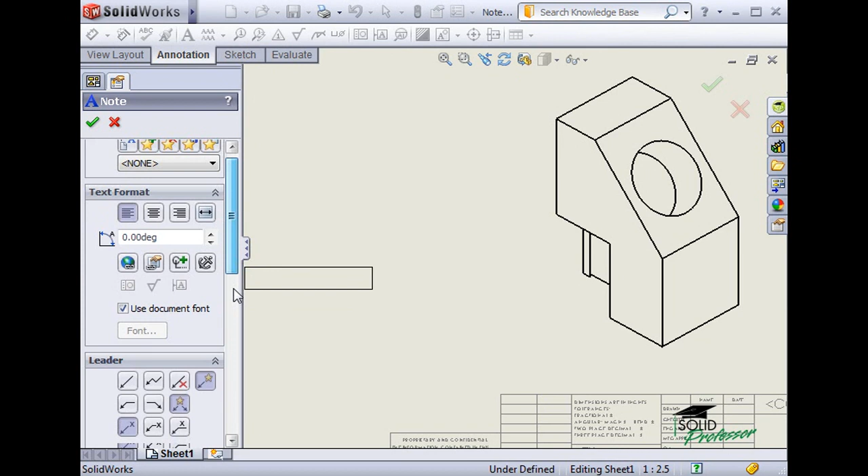If I were to select the Leader option, a leader would always be displayed regardless of where I locate the note. Likewise, the No Leader option eliminates the leader regardless of the note location. I'll keep the Auto Leader option on for this example.

As soon as you click on the drawing sheet to locate a note, the formatting toolbar will automatically appear. You can use it to change font type, size, and style. You can also change the text color and justification. Just like in word processing programs, you can format specific characters by selecting them and choosing different formatting options. This also allows you to create notes with multiple lines and bulleted lists.

Once you're finished with the note, you have a couple of options. You can complete the note and exit the Note command by clicking the green check in either corner. Or if you wish to continue creating additional notes, simply click anywhere else on the sheet. This will finish the current note, but the Note command will remain active, so you can go on to the next note by clicking again.

Notice that the same text is automatically repeated. This can be useful at times, but if you need to type something different, go right ahead. The new text will overwrite the existing text.

Once your notes are in place, you can control their alignment using two different methods. The first is to dynamically change the note alignment by dragging the note. Notice as I move my cursor along the bottom of the note, the cursor icon changes. When I select the note near its left edge and drag it, it will try to snap to the left of any other notes. Selecting the middle of the note will snap to the middle of any existing notes, and so on.

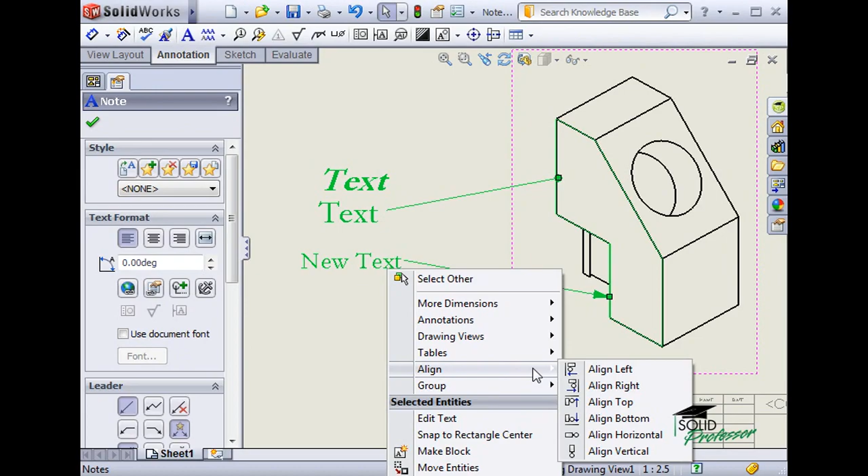These alignment capabilities are not just limited to text notes; they can also be used with dimensions and balloons. With notes, you can also control how the leader lines are attached. Here I have a note with multiple lines. The options in the Property Manager control how the leader is attached—they can be attached to the top, bottom, center, or nearest part of the note.

One more important item regarding notes has to do with Dynamic Drawing View activation. Because of this, notes are associated with their view—when I move the view, the notes will move with it. If you do not wish for notes to be tied to any particular view, use the Lock Sheet Focus option. For more on this, review the section on Dynamic Drawing View activation.

You will find further information regarding notes in the section entitled Creating Custom Sheet Formats. See that section to learn how to create smart notes that update automatically to display typical information such as material, scale, author, and so on.

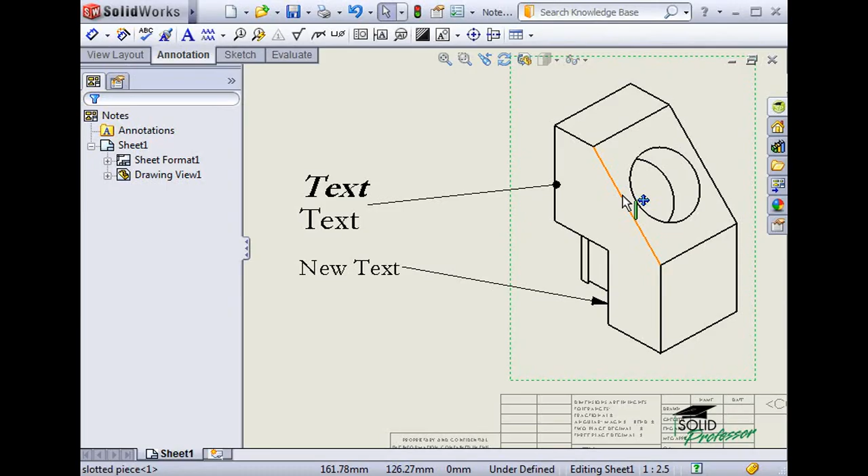Creating an assembly drawing is very similar to creating a part drawing. Starting a new drawing, selecting a sheet format, and creating drawing views—all of this is done exactly the same as with part drawings. There are, however, a few things unique to assembly drawings.

One of them is the ability to create a bill of materials, or BOM. A BOM is a parts list—it identifies the different components in an assembly. Generating a BOM in SolidWorks is easy.

First, you have a view of the assembly. Here I have an isometric view, but any view will work just fine. Next, you select the drawing view of the assembly so it's activated. Once the view is activated, you can bring in the BOM using the Insert Tables drop-down menu and selecting Bill of Materials. Next, this window will prompt you to select from several options to create the BOM.

Eventually, you may want to customize a template to conform to your company standards, but for now I'll select the generic template as you see it. You can select the option for top-level parts only, include parts from subassemblies, or make the BOM specific for any configuration you may have already set up. Don't worry if you miss any of these options, they can be modified after the BOM is placed on the sheet. I'll accept the defaults at this point and click OK to generate the BOM.

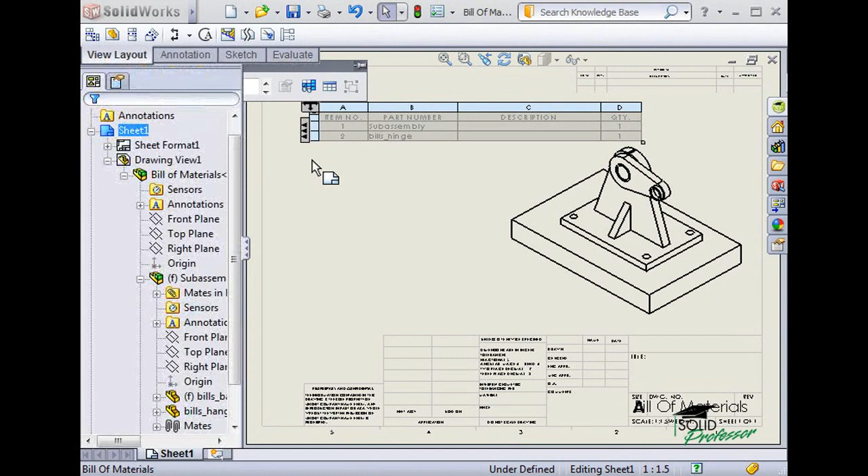Right-click on a blank area of the sheet and select Edit Sheet Format. This will isolate the lines and notes that belong to your title block. Any point or endpoint of a line can be used as an anchor. To set the anchor, right-click a point and select Set as Anchor, Bill of Materials.

Once this is done, we can exit Sheet Format mode and return to Edit Sheet mode. Remember to return to Edit Sheet mode, right-click a blank area of the sheet, and select Edit Sheet.

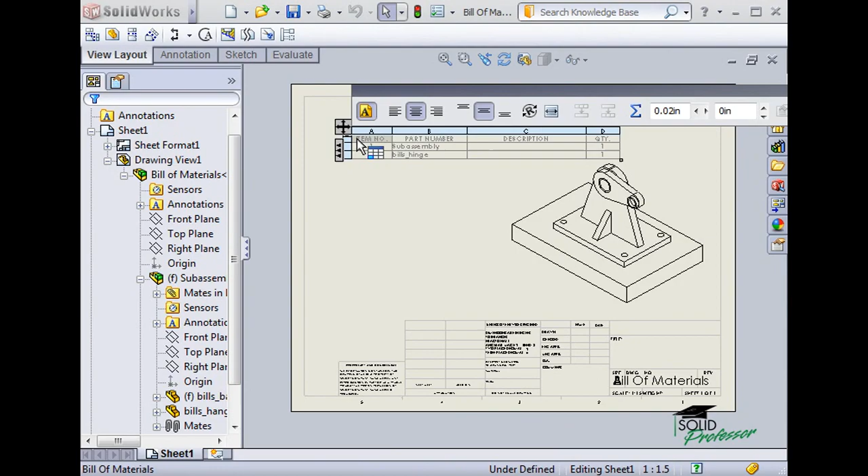Now that I've established an anchor point, I can return to the properties of the BOM to attach it to the anchor point. Select the BOM table to bring up the properties. Be sure you have the entire table selected by clicking here at the top. Here you see the option to use an anchor point. I'll select this option, and now we can decide which corner of the BOM will be tied to the anchor point. In this case, I'll select the top left corner and click OK.

As you can see, the table is anchored. It's no longer free to move.

Let's take a look at another BOM option that's important when dealing with assemblies containing subassemblies. This assembly is made up of 3 parts, but 2 of them are in a subassembly. The way the parts are listed in the BOM, you can't tell that a subassembly exists in this assembly. There's an option in the BOM properties that can change the appearance of the subassembly. Here in the middle, I can choose to display the subassembly as if it was a part, or I can choose to display the subassembly with its parts indented.

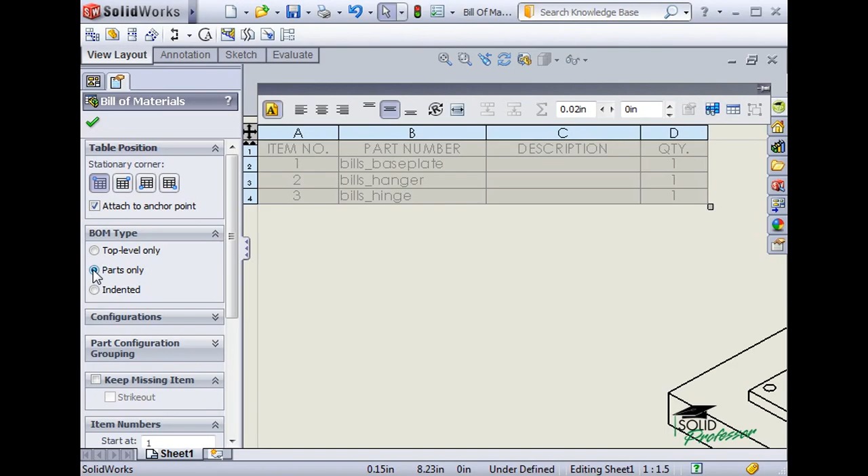SolidWorks lets you customize your BOM tables with almost unlimited flexibility. I'd like to show you a few common ways to do this. Here I have a drawing with the BOM table already added. To get started, I can edit the structure of the table by using the Assembly Structure column of the Bill of Materials. To view the Assembly Structure column, click on the arrows on the left side of the BOM.

If I right-click on one of the icons, you can see I have the option to exclude the component from the BOM. When I click on it, a window asks me to confirm that I will be removing the component. I'll click OK, and the component is removed. To return it, browse for the component in the feature tree, right-click on it, and select Include in BOM.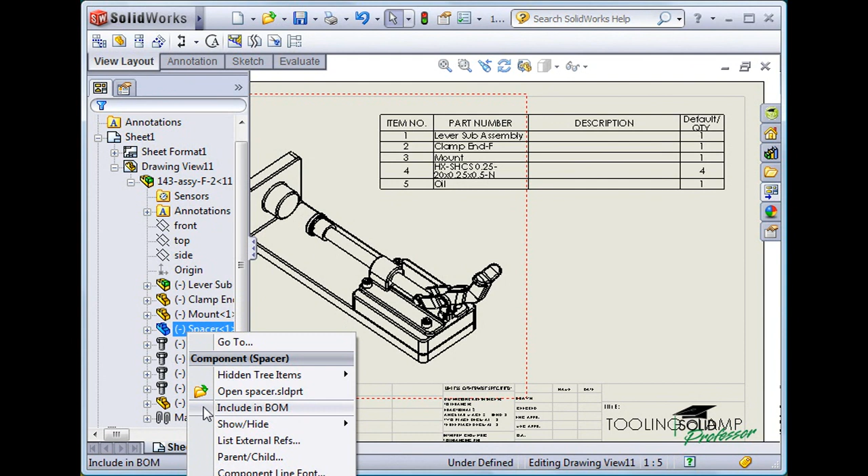If I again right-click on a component in the Assembly Structure column, you'll see another new option called Component Options. When I click on it, a pop-up window appears with a couple options. The first option allows me to change the name of the component in the BOM. I can have it set as the document name, the configuration name, or set it to user-defined to enter a different name.

Since this is a subassembly, I get a section called Child Component next. If this was a single component, this section wouldn't be visible. Here I can show or hide the subassembly, or select Promote to dissolve the subassembly and view each component by itself in the BOM. Now I can click the green check, and since I had Promote selected, I'll get a message window to confirm that I'll be dissolving the assembly in the BOM. I'll click OK. As you can see, the subassembly is no longer visible, but each of its components is now listed individually.

The next section edits how the quantity is calculated. If you have an item that you need included in the BOM but that doesn't have an exact quantity in the assembly, such as an epoxy, lubricant, or length of wire, you can edit how the quantity is displayed here. However, you must first have a custom property created for the part. If you don't have any custom properties created for the part, the only option here is None. The drop-down lets you select any of the custom properties you've created to be displayed in the quantity section of the BOM. It's important to note that you can have SolidWorks automatically link any custom properties you've defined to the bill of materials, such as the description as well.

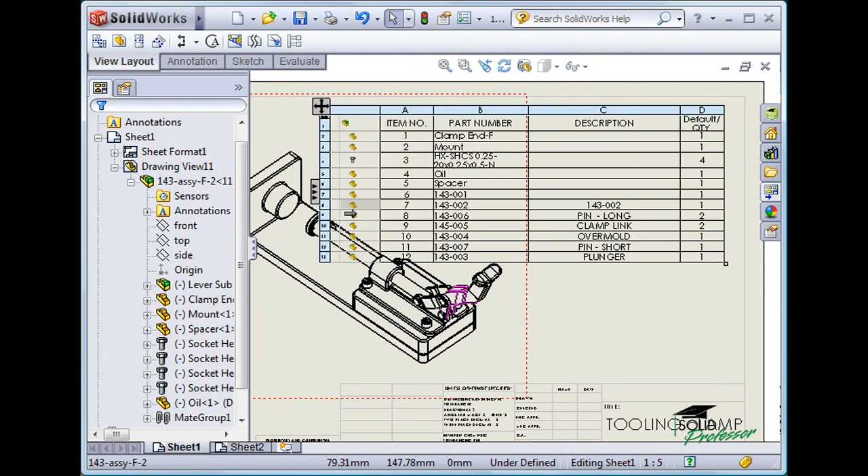Selecting a component in the feature tree will highlight it in the BOM. If I hover my cursor over the icons in the assembly structure column, a thumbnail preview of the component is shown.

Bill of materials can also now be moved between sheets in a drawing. To do this, use the Move icon in the upper left-hand corner to drag the BOM over a different sheet tab at the bottom. You'll see the cursor change to an arrow, and releasing the mouse button will move the BOM. I can also drag and drop a BOM onto a sheet in the feature tree to move it. Just click, drag, and drop over a sheet name.

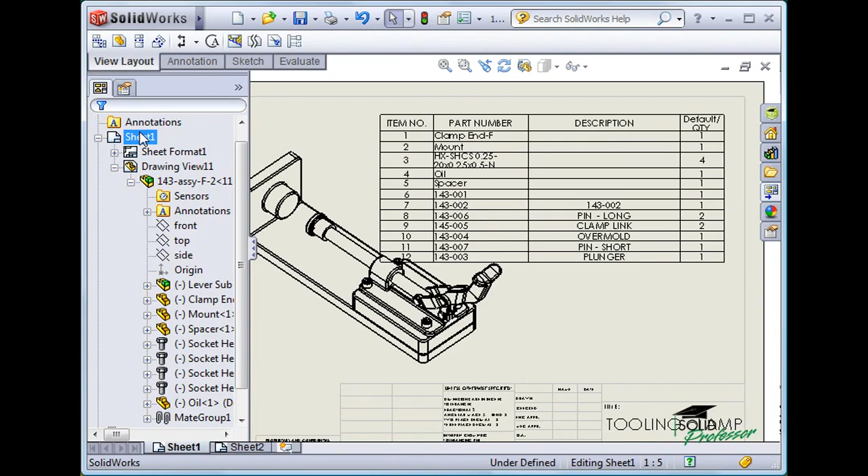There are a couple more new things I'd like to show you in working with BOMs. Let me switch over to a different design. Here I have a simple assembly with the bill of materials already created at the assembly level. I also have a drawing already created for this assembly. I'll open the drawing and go to Insert, Table, Bill of Materials.

I'll choose the assembly view on the drawing sheet. Notice in the Property Manager, I have the option to create a new table or to copy an existing table. I'll choose to copy the assembly BOM.

When I do, SolidWorks also displays a checkbox asking me if I'd like this table to be linked to the assembly BOM. If you choose to link your bill of materials, all the data from the assembly BOM will be parametrically linked to the BOM in the drawing. Now you can still format the tables independently, such as the font size, color, height, width, but the data included in the table will be linked.

I'll make this a linked table. Click the check and click once more to place the table in the graphics area.

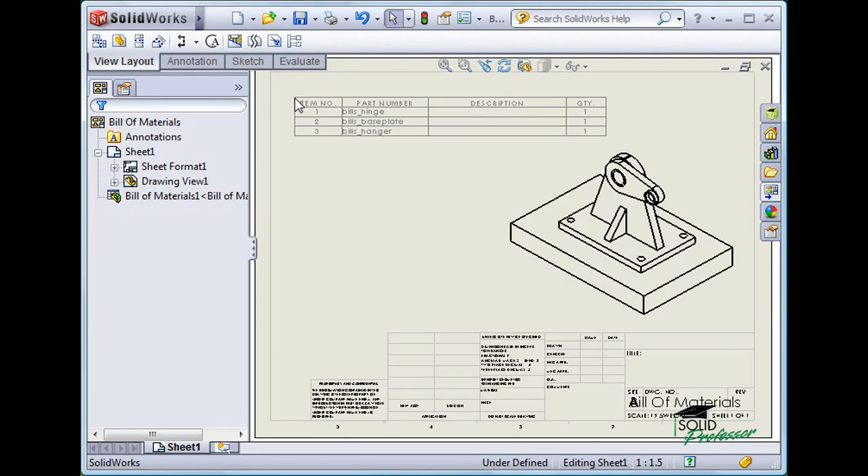If you decide later on that you want to unlink the BOM, simply click the upper left corner to select the entire table and bring up the Property Manager again. You can then uncheck the Link checkbox to unlink the table. One important thing to remember, if you unlink a BOM, you cannot reestablish the link. You have to create a whole new table if you want the link back.

There are a couple more things I'd like to show you when working with BOMs. In the assembly section of this course, I mentioned how bills of material can be created in both the assembly file as well as the drawing file. If you find yourself using BOMs in the assembly file, I'd like to show you how you can leverage the work you might have already done in the 3D assembly and use it in a 2D drawing. Now, just as a refresher, the process of adding a BOM in an assembly is almost the same as I would if this were a drawing, by going to Insert, Table, Bill of Materials.

Here I have a drawing already created for this assembly. If I want to reuse the same bill of materials table that was used in the assembly file, I can go to Insert, Table, Bill of Materials. I'll choose the assembly view on the drawing sheet to tell SolidWorks which file the BOM should be associated with.

Notice in the Property Manager, I have the option to create a new table or to copy an existing table. I'll choose to copy the assembly BOM.

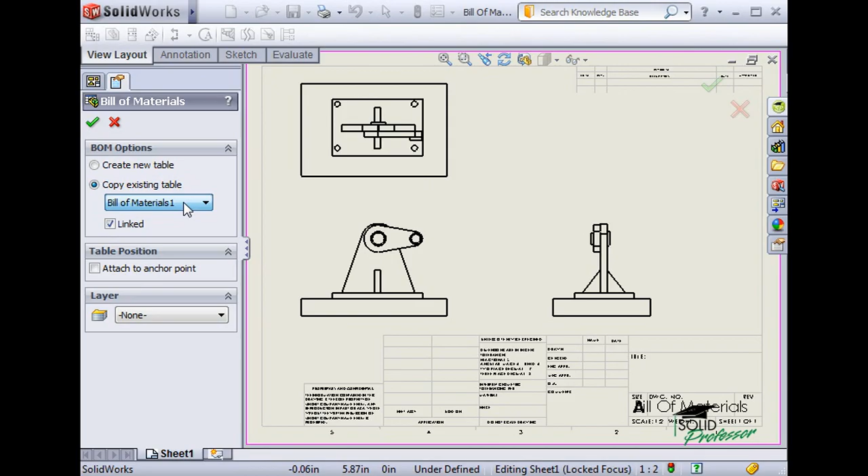I'll make this a linked table. Click the check and click once more to place the table in the graphics area.

If you decide later on that you want to unlink the BOM, simply click the upper left corner to select the entire table and bring up the Property Manager again. You can then uncheck the Link checkbox and click the green check to unlink the table. One important thing to remember, if you unlink a BOM, you cannot reestablish the link.

Just as you saw a moment ago, it's a simple process to reinsert the BOM from the assembly file if you want the link back. There's one last thing I'll mention about the assembly BOM: if you want control of what fields are listed in the table, this is from a setting found in the BOM properties of the assembly.

Let me show you. I'll reopen the assembly, switch over to the Configuration Manager, right-click on the default configuration, and select Properties. This brings up the properties for this configuration. If I activate the Use in Bill of Materials checkbox, the properties here will automatically be used in the Bill of Materials.

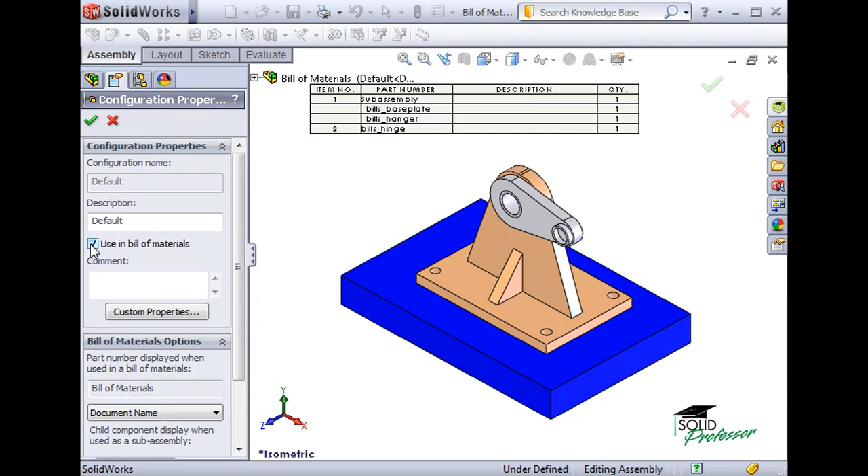Once the BOM is in place, balloons can be used to tie the information in the table to the parts in the assembly view. Because balloons are a type of annotation, you can use Insert, Annotation, Balloon from the drop-down menu, or the balloon icon on the Annotations toolbar. Once the command is selected, your pointer will show a small picture of a balloon next to it. All you do now is click on the parts in the drawing view, and balloons will appear with the appropriate item number.

If you pick on a face, the leader will attach with a dot. If you pick an edge or a vertex, the leader will attach with an arrow. Once the balloons are in place, click OK and position the balloons as you please.

When a balloon is highlighted, the Property Manager appears, allowing me to change the size and shape of the balloon. In the Style section, I can load a previously saved balloon style or add a new style to use in future drawings. The Balloon Settings section is where the appearance of the balloon is determined. I can change the shape of the balloon and the size. Notice there is a user-defined option allowing me to numerically specify the size.

I can also change the content of the balloon. Finally, there is a quantity section. Once I click on the check, a quantity value is placed next to the balloon. This quantity is parametrically connected to the part, which eliminates the need to create a separate note.

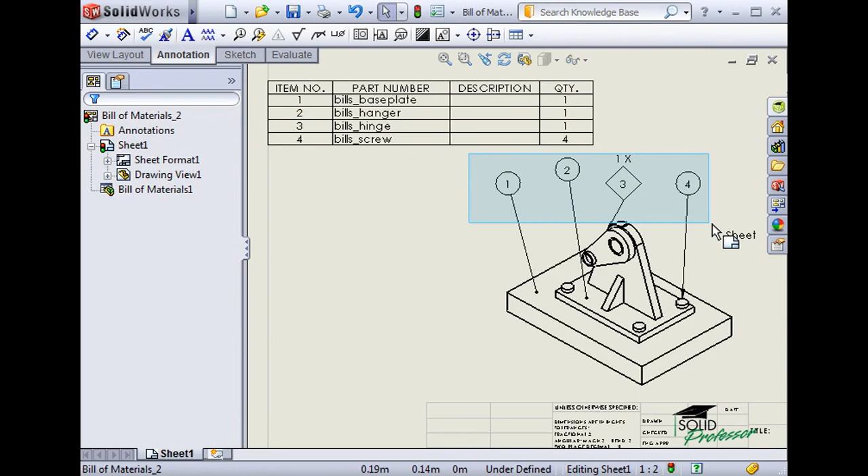You can also let SolidWorks create all of the balloons for you using the Auto Balloon command. I'll highlight the view to make it active, and select Auto Balloon from the Insert, Annotations drop-down menu, or select the Auto Balloon icon.

Here you can select the orientation in which the balloons will appear around the view. For this example, I'll select Top and click OK. Just as we saw a second ago, I can still position the balloons anywhere by dragging them.

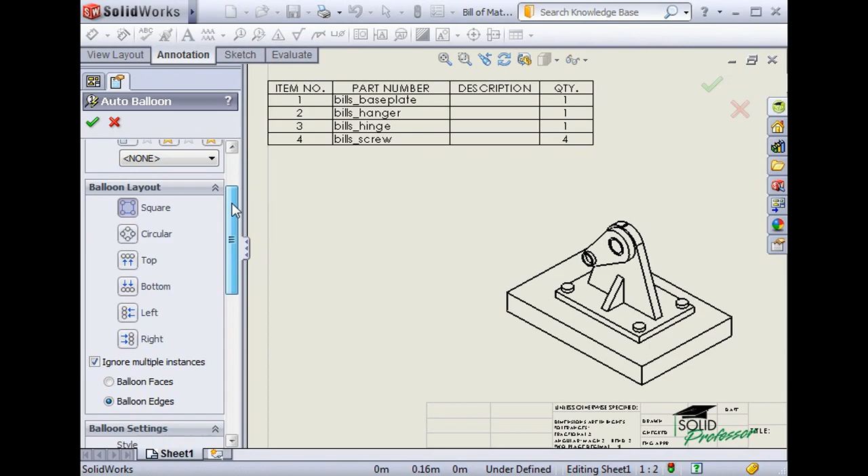One important thing to point out here: if you wish to reposition all the balloons together as one unit, you must do this before hitting the check to accept the auto balloon. Moving a balloon after completing the command will only allow you to move the single balloon and not all of them as a group anymore.

There are many options that affect the appearance of a detailed drawing: dimensioning standard, units, note font, arrow size, and the list goes on. You can take the time to adjust these options in the drawing options setting, but it would be nice to be able to save them so you don't have to repeat the process each time you begin a new drawing.

This can be accomplished by creating custom drawing templates. To create a custom drawing template, begin by starting a new drawing file. If you select a sheet format or title block here, it will be saved into your drawing template. For instance, if I select an E-Landscape format, every time I use the custom template, it will have an E-Landscape title block. If you don't want to be tied to any particular title block, select No Sheet Format here.

Now, let's make some changes to the settings that will affect this drawing. In Options, notice that all settings are divided into two tabs: System Options and Document Properties. All changes made in the Document Properties tab will be stored in the custom template you create.

For this template, I'll select ISO Standard. I'll change my note font to 24. And I'll change my units to centimeters with 3 decimal places.

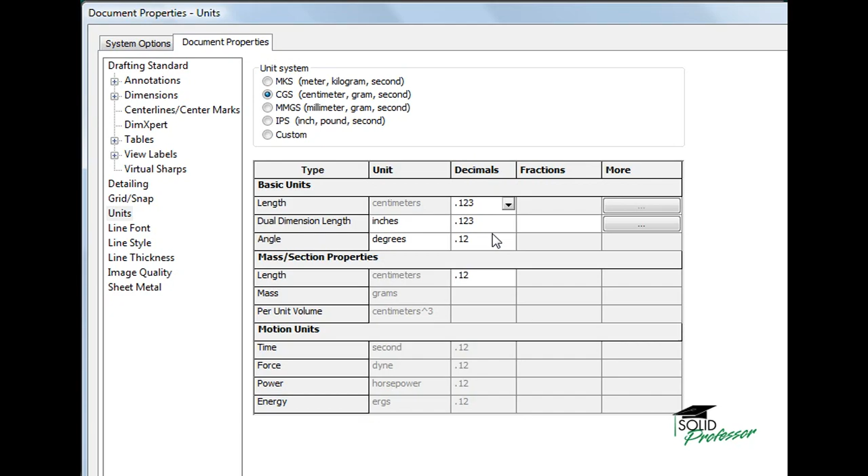Once these options are set, it's time to save this template. From the File drop-down menu, select Save As, and change the Save As type option to Drawing Templates.

The directory you are saving in will automatically change to a default folder where SolidWorks stores its templates. You can save your template here, or browse to a completely different folder on your local hard drive or on a network if you prefer. If you choose to save to a folder other than the default, there's a special step you must perform to access your custom template. I'll go over this at the end. For now, I'll give my custom template a name and click Save.

Now that the custom template is saved, when I begin a new file, you can see it as one of the templates I can start with, and I don't have to worry about changing all my settings every time.

I mentioned earlier that if you choose to save your custom templates into a folder other than the SolidWorks default, there's an additional step you must perform. Let me save this template into a different directory.

If I begin a new file at this point, notice that the template I just saved does not appear on the list. To make it visible, I have to tell SolidWorks where I saved it. In Options, there's a section called File Locations, which allows me to tell SolidWorks where to find certain types of files, in this case, document templates.

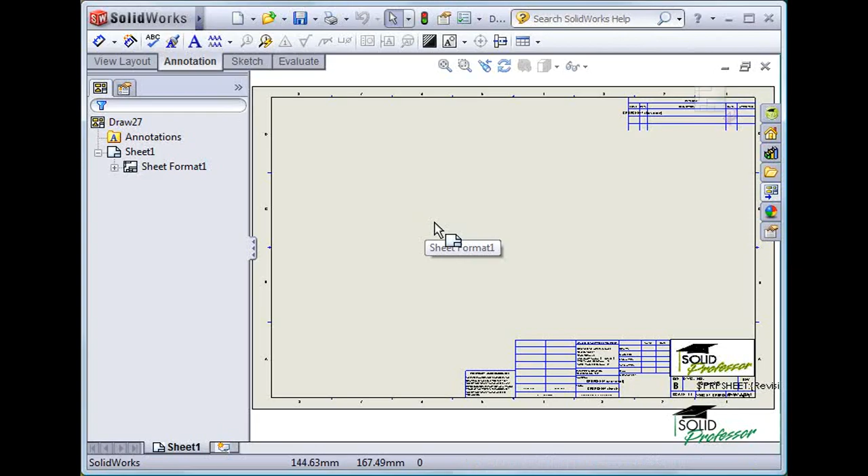There are two types of notes here: these standard notes, which are nothing more than text, and these smart notes. Smart notes allow you to display information about a file instead of typing it in each time. For instance, here under Material, instead of typing in steel, a smart note is used to display the material of the model contained in the drawing. If this was not a smart note, when I used a model made of plastic, I would have to manually edit this note to read plastic and not steel.

In an earlier lesson, we covered how to create standard notes. Here I'll show you how to create a smart note. Use the Note tool, just as you would with a standard note, and click the location of the note. Instead of typing in text, click on this button to link this note to a file property.

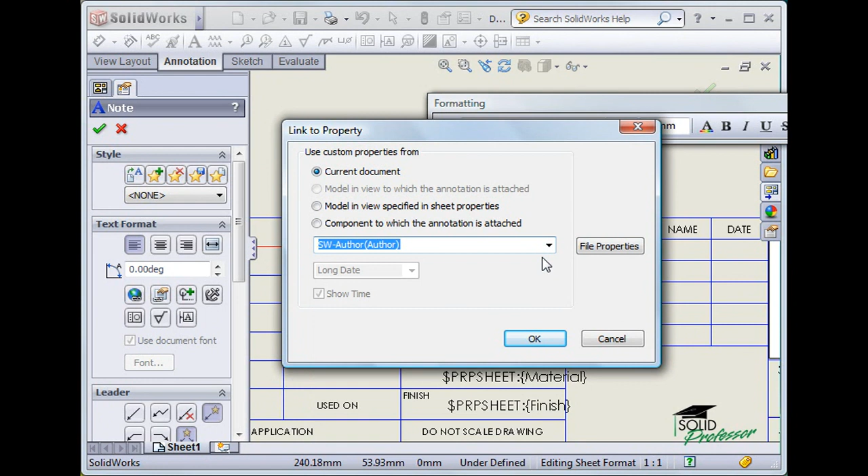Since we're linking to a file property, you can choose whether you want to link to the current file, which is the drawing file we are working on, or a model shown in a view. This would be a part or assembly that would eventually be displayed in this drawing. For this example, I'll use Current Document and select a property from the list, in this case, the author of this drawing. Adjustments can be made to justification and font as needed.

The sheet format includes notes, but also the title block fields. These fields are created with lines just like a sketch, so they're easy to modify. In this sheet format, I'll get rid of the revision block up here in the corner. I'll select the line segments and hit delete to get rid of the line segments and the notes altogether.

Now that I've made some changes to my sheet format, I'll go ahead and save it. In the File drop-down menu, you'll find Save Sheet Format. I have two options: I can overwrite the standard B-landscape sheet format, or I can create a new custom sheet format and leave the original B-landscape unchanged. I'll select the custom option to create a new one.

Now when I create a new drawing, I can select the custom sheet format option and browse to my newly created sheet format to start with.

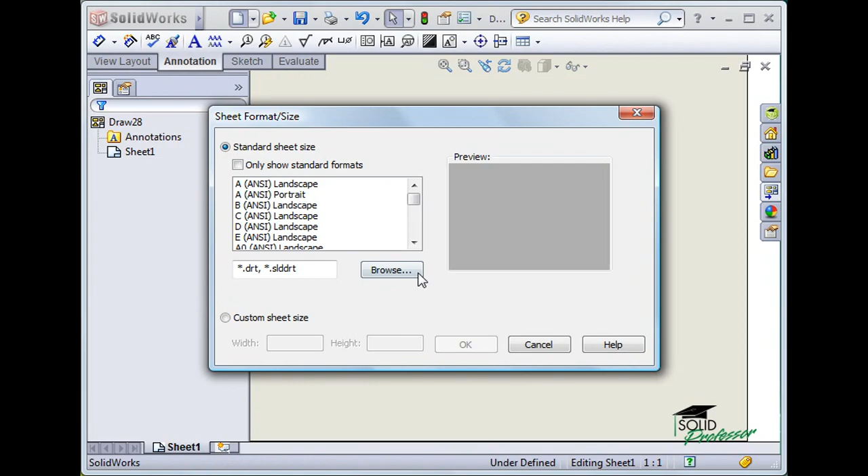This concludes the section on drawings in SolidWorks. If you feel unclear on any of the sections presented, feel free to review any specific category from the menu.